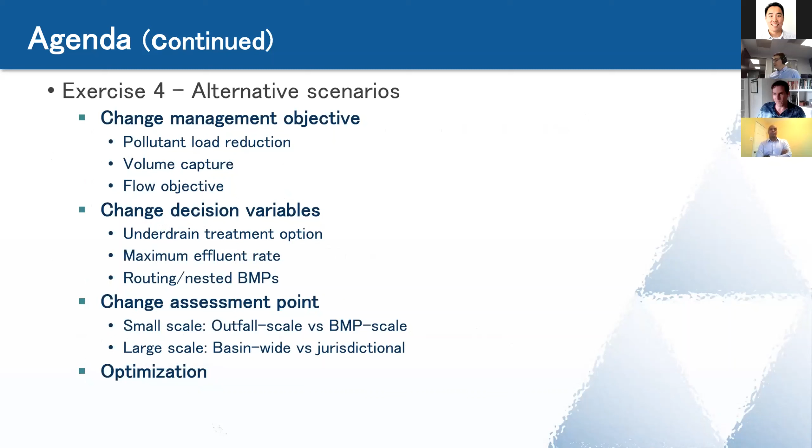And then there is a little bit of extra bonus. So depending on how much time we have at the end of the session, we may be able to get into exercise 4. There's going to be a lot to unpack in these first 3 exercises, and with whatever time remaining, there's all sorts of additional functionality and useful things that we can get into in this 4th exercise. I hope we have time to get through quite a bit of it, but we're going to play it by ear and see how much we can do. So that's our agenda. We do have these set of objectives that we want to put up front, just to put us all on the same platform for what we're about to get into.

And the objectives are: 1, understanding Sustain just as a model. It's a process-based BMP model, and we'll get into what that means. If we can help everyone understand what that means and how Sustain operates in broad terms, that's our first goal. And then once we've done that, having you all be able to prepare a Sustain input file for simulation. So to do that, you would need to be able to run LSPC to generate an input time series, configure the necessary folders and files to get that run ready, and then adjust input parameters to match project design. And a lot of that, if you're not familiar with Sustain, might sound like French so far, and that's okay. It'll make sense if you rewatch it again at the end. But by the time we get through this, hopefully everyone will know what those things mean and how to do those things.

Second to last is being able to troubleshoot common errors. For anyone who's modeled LSPC or any other program, there are a lot of challenges and issues that come up when you're running something, because there's so much that's going into these models, and there's a lot of little things that come up very often. And so we'll go through our list of common issues that we feel like we come across a lot. And hopefully by sharing those with you, you all can understand those so that you don't have to hit those speed bumps as often. And when you do, you understand what to do and how to overcome them.

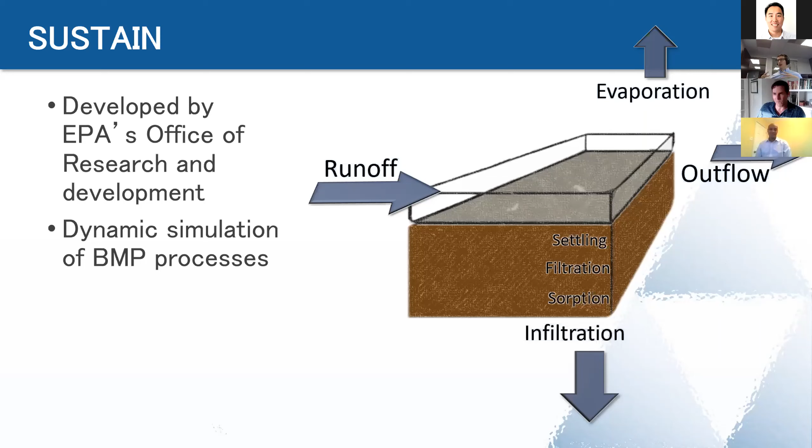So if I only have evaporation right now, but I want that to represent evapotranspiration from plant processes, that's just a dial that we add. We can also add an underdrain. And those processes, like bioaccumulation, biotransformation, phytoremediation, we don't necessarily have knobs or dials for within the model, but you can simulate their effect by adjusting parameters. So just adding a little bit of that for how to adjust and dial in processes.

Yeah, that's right. Thanks, Ryan. And as you see, we think of it like a Lego box, right? So you put the pieces together that you need to represent the construct that you're trying to simulate. And so if you have an underdrain, you can tack that piece on at the bottom. Now the system has some guidance to step you through what types of opportunities, because really the opportunities are limited by your imagination and how you can construct these things.

Some of the processes that are listed in here sound pretty involved. Now the model is not going to be simulating phytoremediation, but for example, if you have laboratory information or a case study where you have what that process looks like in terms of the time of decay of a pollutant, or the filtration rate through a soil media, or the final effluent concentration through the underdrain, those are the types of information which are usually commonly available or that you can monitor in the field. SUSTAIN gives you a way to put those in to represent those complex processes.

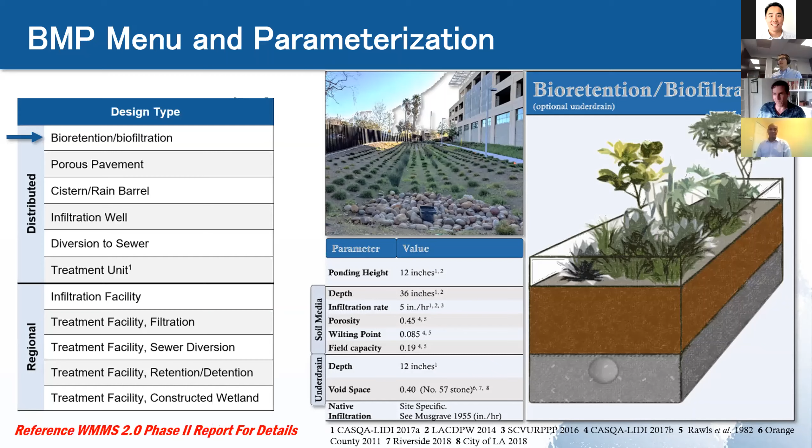But this is a little bit of shopping. If you want to do porous pavement, we would just recommend you go to the WMMS report and look for those design detail specifications, and you can port those into the model, and we have the citations and sources for that. So it just sets you up here for that. Awesome.

Okay, so that concludes the first part of just setting us up. If there are any questions, I think it's a good time to raise a hand, and we can address some of those things now as they pertain to those slides. And if there's nothing, we're going to get right into the first exercise, which is going through model preparation. Okay, I'm not seeing anything, so we're just going to jump into it.

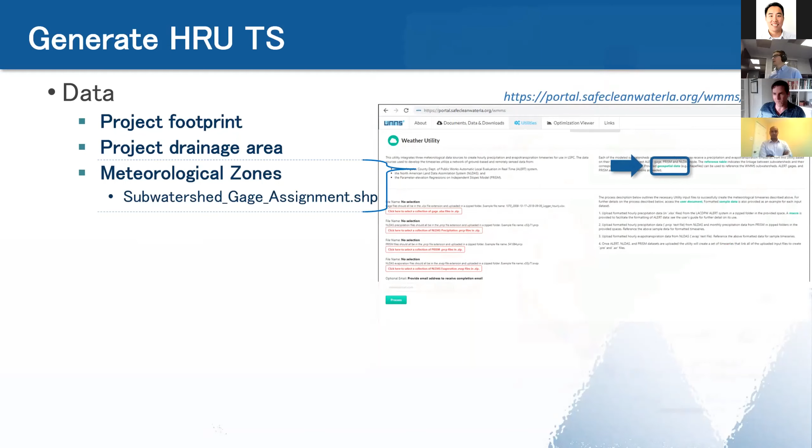So let me flip to the next slide. And I've got that same image we had before showing the drainage area, but now I've popped on these meteorological zones. So that's what these pastel colors are, showing the different zones for precipitation. And so you can see that a lot of the drainage area is this P391C_3, and you don't have to worry about what the numbers are. That's less relevant. But that's how we've named these things. There's a whole naming convention associated with it.

But it's mostly this green one here on the right, to a somewhat lesser degree, this other one, D1277. And then, actually, I've got some squares on here. We got a little bit up here, pink. We got a tiny amount of D1277 there. And then we have a little bit of this P391. And so if I'm going to get ready to run LSPC to generate runoff for these precipitation files for this particular project, my first thought is, wow, that's a lot of precipitation files. It'd be really easy to deal with one instead of 5.

And so there's two approaches, and John, I'll have you in on this too, but there's two approaches to handle this. We can take this precipitation file and we can assign it to the whole area. Or we can mesh these together. And so if this is maybe 55% of the drainage area, this is 30%, this is 2%, whatever makes up 100%, we can do an area weighted composite of these five precipitation files and create one from it. In most cases, that's probably not necessary.

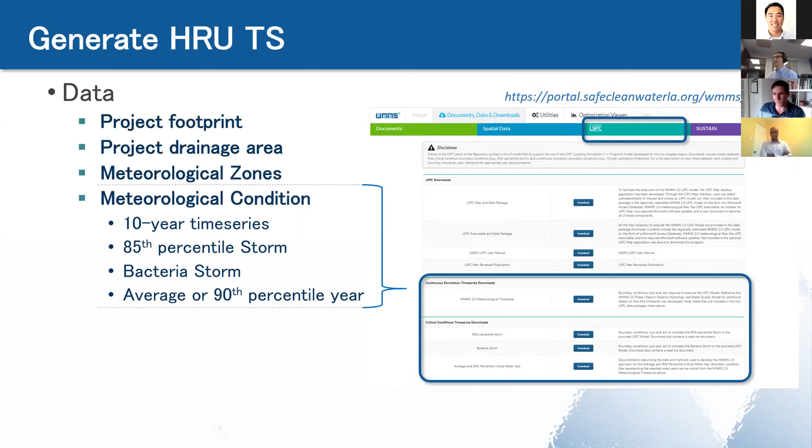We have all that data again on the WMMS webpage in the repository, and this is again the link here. It's within this LSPC panel. About halfway down on the page, there is all this data that can be downloaded. And this is the precipitation for all these different conditions for all of LA County within the WMMS model domain. And so all that data is right at your fingertips. You can get right in there and look at those precipitation time series.

So once we have all those pieces together, the next part is to download LSPC map. This is an interface that we developed last year as part of the WMMS 2.0 update, which really helps expedite and streamline the process of running LSPC. And so John and I are going to pause in a few slides to actually show you how to open up, configure, set up LSPC so that it will give you output that you can use in Sustain.

And so that's coming. But before then, this is the location on the repository where you can download that model package, which includes a number of things. It includes the executable itself, so that when you double click on your desktop or within your folder, it pops open the application. It also includes the weather time series that we developed, which is the same as this right here. There is a Microsoft update in there.

I think there's actually two, because Microsoft just updates things through time. We've included two aspects of the operating system that need to be updated so that you can run LSPC map. And so those two things, as well as LSPC map as a program, I imagine you'll need some sort of administrative privileges on your computer.

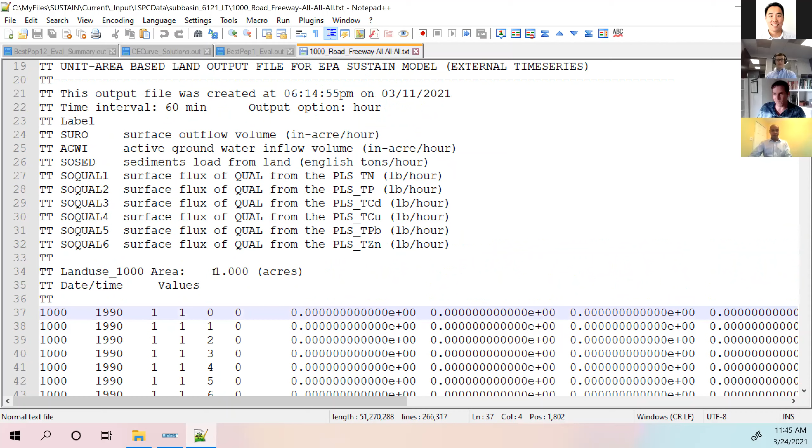And all these are generated for 1 acre of each HRU. There are 99 files in this folder, and 2 additional files, AGWO and IFWO. They're not going to be used in this application, but when you simulate subwatershed 6121, this represents the full set of information to generate all that's coming off the land surface. The AGWO and the IFWO represent the total base flow, interflow, and active groundwater outflow from that one subwatershed, aggregated across all the HRUs in that subwatershed.

So in some cases, when you're running a larger network in SUSTAIN, and you need to route your base flow through the network to some downstream point where you might divert some of that flow into a BMP or a regional facility, that's the piece you would use to link that in. We're just dealing with runoff in this example, but this gives you a view of what is in this folder. Now, what we're going to do in this exercise is generate these files from the LSPC map.

Pardon me. All right, and so here is our view of our subwatershed. I've kind of pre-cooked a scenario in here, and the way that this interface works, it allows you to go in and select a single subwatershed, or you can select a whole network of subwatersheds when you click this upstream. If I click on a specific point in the network, the model will select the upstream network. All the subwatersheds that are hydrologically connected to that will be selected.

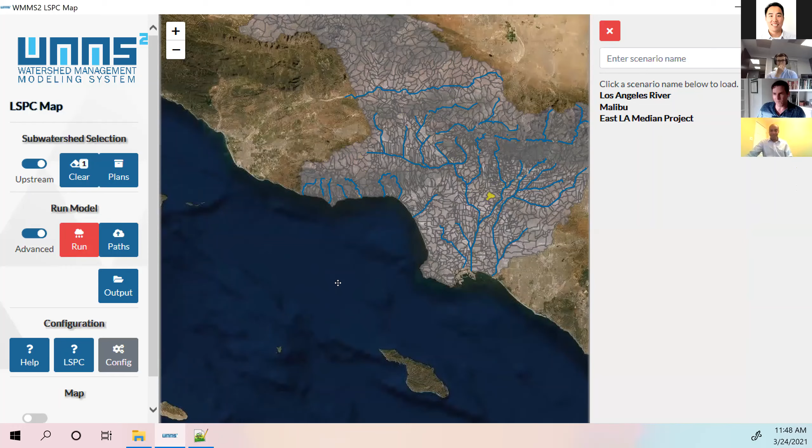In this case, what I'm going to do is just select my East LA Median Project subwatershed. I've defined that as a scenario. So I went in beforehand, selected that subwatershed, and then saved it as a scenario. And so likewise, I have all other scenarios that I've defined. This is the one for the whole LA River. This is Malibu. And here's my itty-bitty project for this case study. So we can just zoom in to see what it looks like.

So a nice feature of this LSPC map interface, it's actually a browser emulator. It's looking at aerial imagery from OpenStreetMaps right off the web. So it's as if you're working in a Google environment, if you will. And here's our subwatershed model boundary. I can see an aerial photograph underneath it to make sure that I am in the right place.

It's not exactly the same shape as the one Ryan was showing before, because that was the drainage area for the specific project. This is the sub-catchment in the model. So we will be doing a different boundary in SUSTAIN than in LSPC. But ultimately, we're trying to get the unit area runoff, which is based on the rainfall associated with this one subwatershed. So we're okay, because that is not going to change. That's independent of the drainage area.

So once I've selected my East LA Median project, I can tell LSPC that I want to run this project. Now, by default, your tool is going to come in the default setting where it's just going to run this sub-watershed and give you an output. For this application, we don't want that. We want to use an advanced opportunity because we're going to tell LSPC to do something slightly different. So when I press run this time, it's going to open it up on the second monitor over here. It brings this screen up. I press OK. I don't need to change any of those settings.

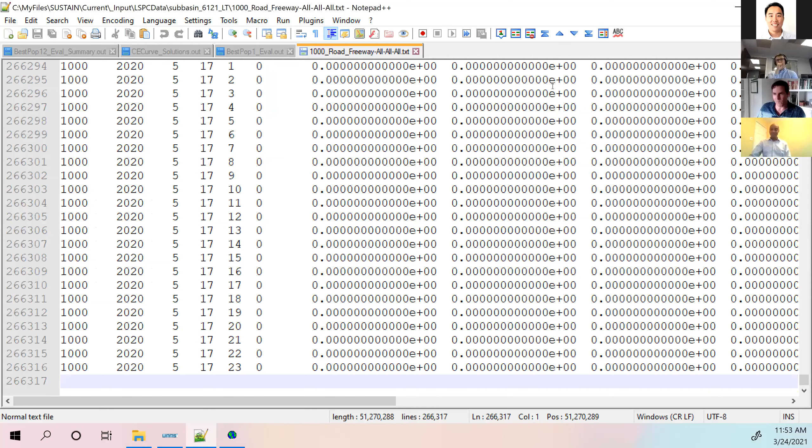Now, the other thing that I want to look at here is the time period. The time series that were read in were the default time series. So this is the long-term simulation time series. For the time period that I'm interested in, I'll just generate one that looks exactly like this file. So it's from January 1st, 1990 through May 17th, 2020, if that's what I want to do.

One way to do that is this knows the boundaries of those files. So I just set the start time to be the very beginning. All I'm doing is I'm pressing the end.

Okay, if I want to change this to be... this was May 17th. Okay, it looks like I don't have the latest time series. Well, I'm going to generate this through water year 2018, just for example here. So we'll go to the end of water year 2018, just for example.

Now, there's a simulation period and an output period. The reason why the model has them is so that we can throw out a period of time as a spin-up period if we don't want to include that in our boundary conditions. So let's say this is from January 1st, 1990, but let's say I wanted to just run the water year starting in 1990, October 1st. I start it from January 1st so that the first 9 months I can just ignore. And then the output is going to begin on October 1st, 1990.

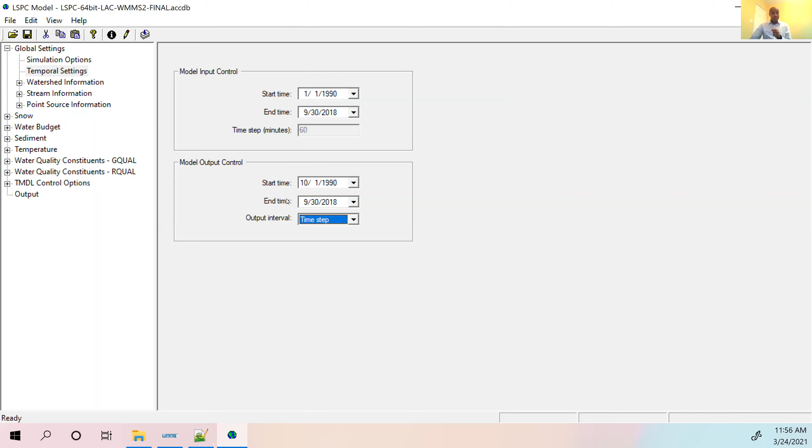That's exactly right. This is how you set your spin-up period. And so in this case, we've defined a spin-up period of 9 months that we're going to disregard. Another key thing with this output period, this is what is going to drive your summary file. So the model allows you to generate summary files for land use, stream, point source, on an average annual, yearly or monthly basis. We're not going to get into those summary files here, but they're pretty important. They're a handy way of summarizing a lot of detailed information out of the model into one nice CSV long form file.

So what I'm trying to do here is to generate my unit area land use time series for SUSTAIN. So I want to make sure that this box is checked. And just because we're customizing everything, I'm going to go ahead and redirect this to the same folder where I'm going to have my SUSTAIN output files. Wait, let me make sure. I need to go to my current input folder. LSPC data, and I'm not going to overwrite this one. I'm going to create a new folder.

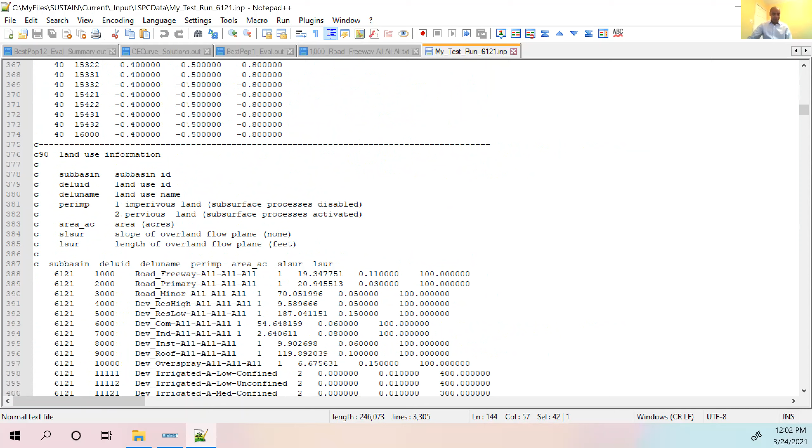And so on. Here's where I specified the inputs, and my output folder is here. It's created this folder and it's running it. And then at the same time, it tells me that I had 96 possible HRUs. Here's where I specified my simulation time period. If I go down to card 90, card 90 has my land use information.

So for this subwatershed, for this HRU, I had this much area in acres. I am running the subwatershed, so it's going to give me runoff aggregated for all the HRUs in this watershed, and it's going to give me my unit area loads. Notice that we didn't have some of these HRUs, like there was no irrigated A soils, low slope over an unconfined aquifer. There is none of that in this subwatershed. But my unit area time series will have a file for that, just because it is a possibility.

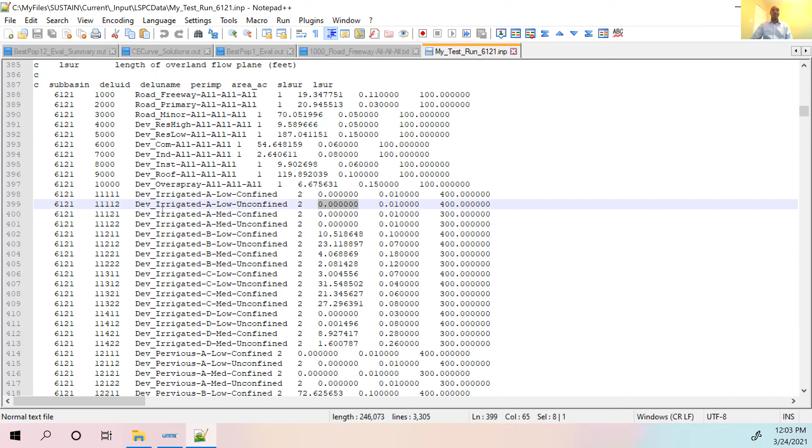Part of the beauty of this later on is, imagine if you're running SUSTAIN and you want to do land use change scenarios. Let's say you want to increase development in your drainage area by 10%. That gives you a chance to reconstitute by adding a little bit more impervious area, assuming that that's what development is doing. You can reconstitute your footprint of HRUs to represent a land use change scenario. And so that is an illustration of some of the flexibility that comes along with that.

John, I'll add on here that, I don't know how much we need to go through the input file, but I don't think Public Works as users will probably go through the input file. Hopefully, won't have to. So if this seems a little overwhelming and daunting, it's because there's a lot of information in here, and LSPC has been built with that dialog box interface, and LSPC map has been built so that a user can stay out of that realm as much as possible and work on the interface, because that's easier and more intuitive than a text file.

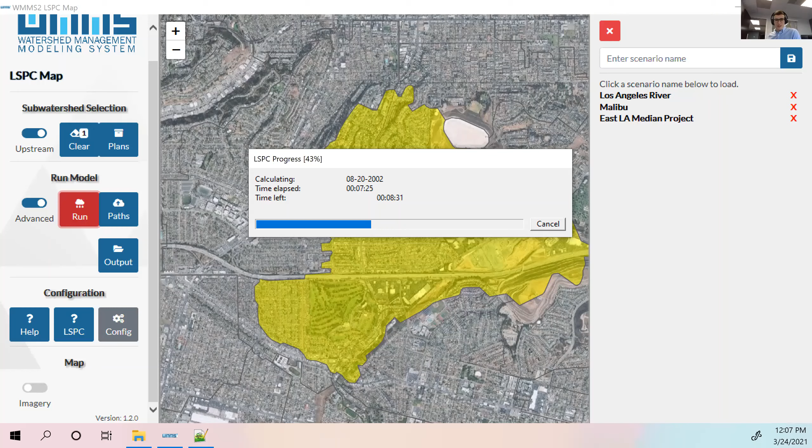All right, so I'm going to go back over to my screen, and I just want to bring home the point about what you're going to get on the output from LSPC. I already have that LSPC output pre-baked. It's in this folder structure over here, and you'll recognize these output folders. And if I go to long-term, this shows for all 96 of the HRUs, there's a text file. And if I open up road freeway, I get that time series again.

I actually don't run LSPC very often. I usually have someone else run it for me, and then they give me this, and I'm like, okay, great, thank you. And I just trust that it's right. But there is probably some level of QA that I would generally recommend anyone does when running the model. If you want to feel confident that the model is giving you sensible output, this is a place to do that.

For me, text files are not intuitive to work out of. So what I would do if I wanted to take a look at this output on the fly, and it might be a bit to paste, so let's see if I can just do a portion of it. I can drop this into Excel really easily, and all those tab delimiters just drop into the cells. And if I wanted to plot this up and see what that hydrograph looks like, because this is a hydrograph, I can see a little of that coming through. I'm only doing the first couple days, and apparently there wasn't much precipitation, so there isn't much action here.

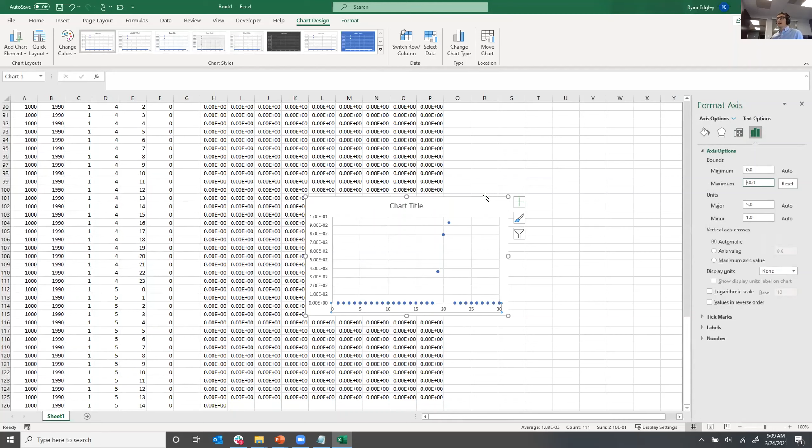The format for this text file is a little, I don't know, not really my conventional way of looking at text files. So you can actually aggregate the year, the month, the day, and the hour into a single cell. I forget how to do it. I think you can do something like year, and you're like, hey, yeah, this is a year, and then you can do month. Yeah, hey, this is a month over here, and you can aggregate that and bring that all into one column here. And then if you plot that, you can get a really good picture of at every hour of every day of every year, this is the runoff that was generated.

And then I'll just plug in on that, Ryan. That would be the date function. Date function. Thank you. Yeah. So with the date function, then you say date and then year. Yeah, there it is. On the day. Yeah. Beautiful. Now it's all in one.

And sometimes what I'll even do is I'll use this function. What is that doing right now? I was having a tough time, but you can transpose the selected cells, and you can just put them over here. So instead of going counting over here and then counting over there, you can just set those, blow all these out, and you can see exactly what's over top of each of these. And to me, there's a little bit of work involved to kind of get this set up, but once you have it set up, you can actually take another input file, output time series, and you can just paste the bulk of the time series right here. And you don't necessarily need to update this other stuff because every input file follows the same format.

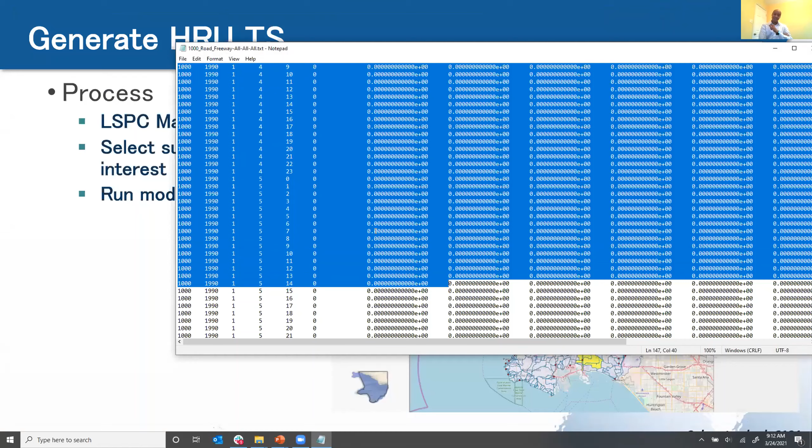Just to recap on that, this file is for 1 acre of runoff. So that's another consideration. You're going to actually reconstitute the drainage to your BMP in SUSTAIN by saying how many acres of this file exist. Yeah, that's a really good point. And so when I look at these, I'm always like, wow, those numbers are so small. But what John just said is that this is a representative acre of roadway. And so in our drainage area for this BMP, there may be 30 acres of this type of roadway or HRU, and 20 of another one, and 10 of another. And so that's a multiplication factor on this time series. And so what SUSTAIN does, it'll load up all of these HRUs, and then whatever acreage we specify, it'll multiply that number times all of these, and then it'll aggregate based on drainage area.

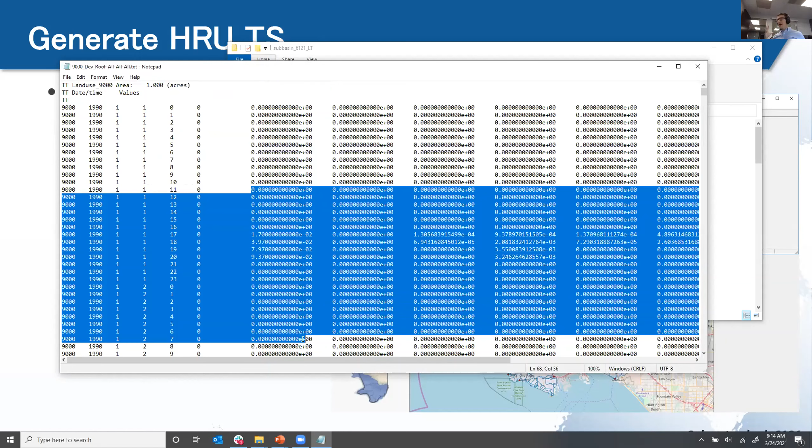What I was thinking in my head was, if this was rooftop, and we do have a rooftop one, don't we? Let's say Jeff Bezos gives you a call. He's like, hey, I've got this Amazon warehouse. It's going to be huge. We need a cistern to capture that. You don't need 96 HRUs to do that. You just need roof. And whatever Jeff Bezos says is the acreage of that, you put that in that SUSTAIN file, and maybe it's 100 acres. And SUSTAIN is just going to take these numbers and multiply it by 100. And so there's not any sort of weird math, there's nothing too fancy or complicated.

We use the unit acre because it's a small enough standard that we can apply and scale up to any size to meet the drainage area that's there. And so if it's 100 acres of this, or 10 of that, and 12 of that, and 11 of that, SUSTAIN does all that work to aggregate and multiply all that. We just have to give it an outlet at the end and say all of that HRU and runoff that results from that goes to this point. And that point might be a BMP, it might be a node, it might be the outfall. And so that's what the SUSTAIN part of it is, figuring out that drainage. What we're doing here is just giving SUSTAIN those unit area pieces of runoff and pollutant loading, so that it can run any sort of combination of HRUs that we want to give it.

Whew, that was a lot. John, I'm going to wrap up this section. Is there anything else you think we should add or is worth mentioning here as we wind down on LSPC? I think that covers it. Okay. Right, a good transition to SUSTAIN.

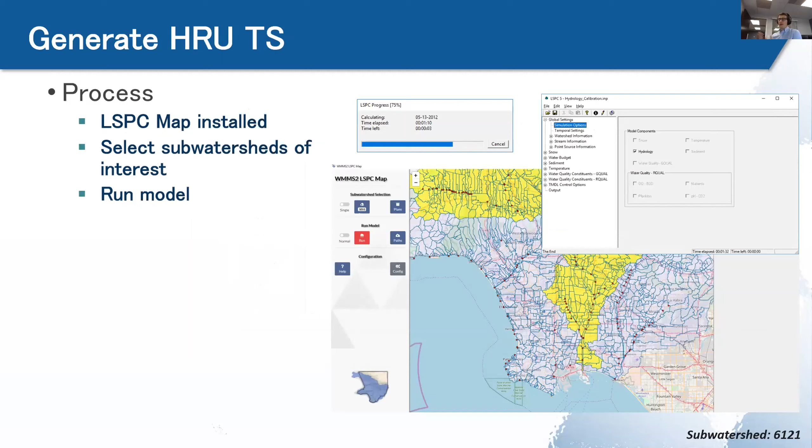Great. So that was really the end of our first exercise, and I'll do a brief recap here, which is we want to get the data that we need in terms of the drainage area, meteorological zones, the condition we want to consider, downloading and installing LSPC map. John walked us through that we want to do the advanced function once we've selected our subwatershed of interest. We click through that first screen, we make a couple changes in terms of output and dates, and then that final checkbox on the unit area time series output, which we were just looking at over here.

And then once we've looked at those files after running it, feel good about it, feel confident about our LSPC results, then we're ready to transition to SUSTAIN. And so that's what the next exercise is.

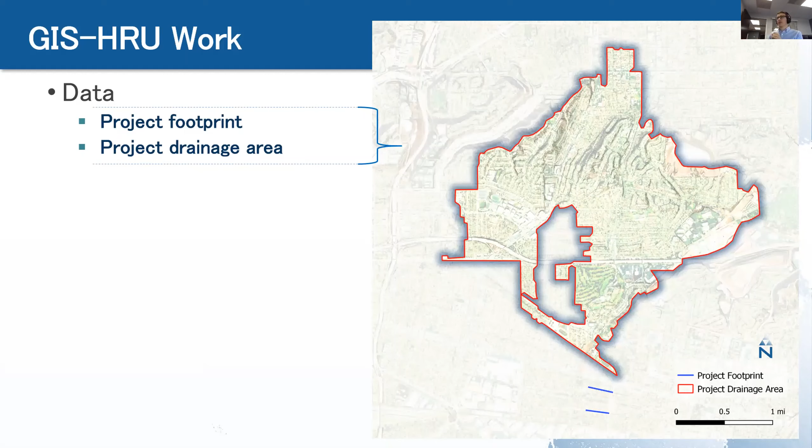So John was showing how we can generate time series for all 96, but we may not have all 96, and we don't necessarily know how much acreage of each is in our particular drainage area of interest for this project. So again, I'm showing this map of our project drainage area, and we're going to want to grab data from the WMMS web platform. Again, the link is up here on the top, and we want what's called the complete HRU raster. There's two here: the mapped HRU raster and the complete HRU raster.

Again, this is one of those things where we have both so that people can use either. Mapped doesn't include a number of things that the complete one does, and we don't really need to get into those details, but I think you'll always want to use the complete HRU raster. It includes disconnected impervious area. It includes irrigation and overspray. It is the complete set of HRUs for WMMS 2.0.

So this is what you would download, and that is a TIFF file, or a raster of the model domain. I don't have a legend here because there's 96 of them, and it would get pretty cumbersome pretty quickly, but it shows high slope, tall vegetation, soil type A, or low slope, soil type D, impervious cover for a rooftop. It has that whole range within this. And what we need to do is figure out what's our composition for our drainage area. It's great that we have this whole area, but we only need the portion for this particular model area.

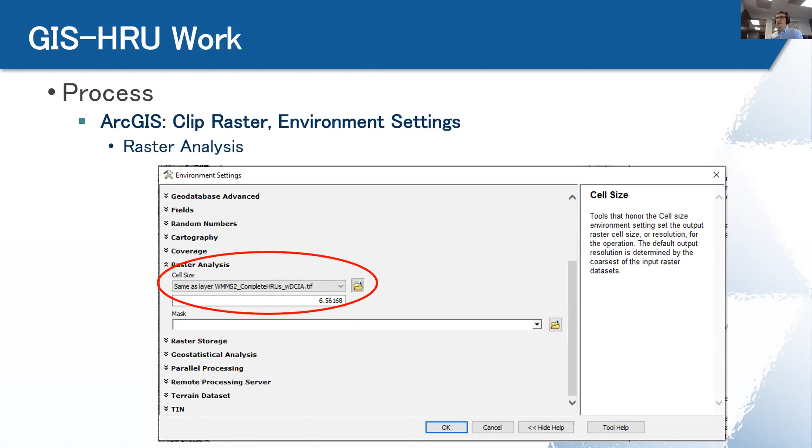And so once I've done that, I've clicked OK, I've hit execute. It might take a few minutes depending on how big your area is, but this is what results. That big raster that we had before has been clipped down just to our project area, because this is the area of interest for us.

You oftentimes have to build a raster table for these after these clips, and so there's another function in ArcMap that will do that as well. And so it's really easy. I just do a control search function within ArcMap for build raster table. I drop in that new clipped HRU raster that I have. I check overwrite just in case, and what I get is an output table.

And there's a couple things that are worth mentioning here, and that is that the values here, those are the HRU codes. And so we showed 1,000, 2,000, 3,000 in terms of our HRUs that are coming out of LSPC and into SUSTAIN. You'll notice that these numbers here will match exactly with the numbers we have here. And so I've got 22,000 cells of road and freeway, 47,000 cells of road primary, and so on and so forth.

What's really important here is that count is the count of cells, or the count of the number of pixels. And if every pixel is 4 square meters, that's the resolution of the original raster and the raster that we created. There's some math that someone would have to do to say, all right, well, 22,432 cells equals some amount of acreage, which is the unit that SUSTAIN expects in the model. So there is an additional bit of math here that someone would have to do.

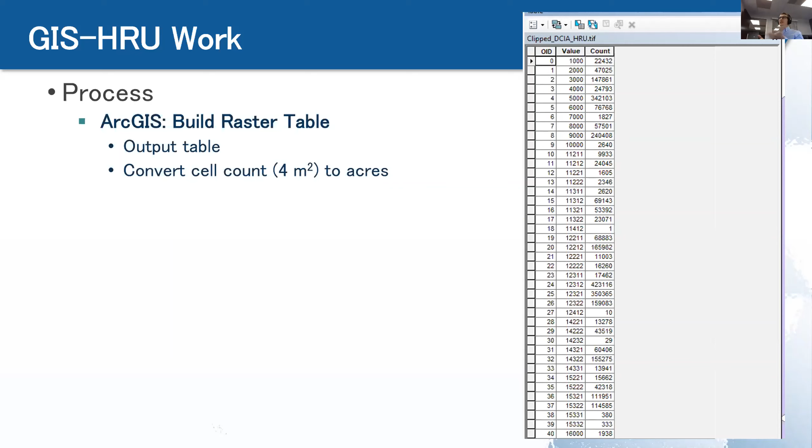So you've got to find that conversion factor for, well, what's 4 square meters? How many square meters are in an acre? And then you can use that to convert to get acreage of each of these HRUs. So that's kind of a quick, simple rundown of it. There's more complicated ways to do it.

We do have a utility tutorial document that goes through everything that I just explained pretty well, but also if you have multiple drainage areas for multiple different BMP types, there's another avenue in GIS that you would take to do that, and that's zonal histogram. We're not doing that here because we're doing a pretty simple drainage area for this particular project. But in the future, if that comes up for you running a model, I would recommend going to this documentation and looking at how that describes that process, because that'll be helpful in showing that pathway forward.

Yeah, just one comment on that, Ryan. I think one key thing behind this complete raster, and Ryan touched on it, it has baked into it a lot of the key assumptions that went into the model build. So when you look at this, we talked about directly connected impervious area. In the model, the mapped impervious area is what you see from a bird's eye view.

But in the model, the actual response, let's say you have an acre of rooftop, but then it's surrounded by a 10-acre lot of grass. The amount of the effective impervious area, some of that runoff is going to go over the pervious area. That whole response is going to be very different than an acre of rooftop surrounded by a quarter of an acre of grass, right? And so the model uses directly connected impervious area to kind of adjust for that. All those assumptions are baked into the complete raster, because we've gone in, done that empirical relationship to translate mapped impervious to directly connected impervious.

Other assumptions like the irrigation, which is represented as a portion of the pervious area. And then even within that, irrigation overspray, which is a percentage of the impervious area that's adjacent to pervious land that could potentially receive overspray from irrigation. I mean, imagine trying to account for all of that. Those things aren't really spatially represented traditionally in the model, but in this raster they are, because what has happened is we've taken the percentages from the model and then sort of peppered on those impacts into the raster.

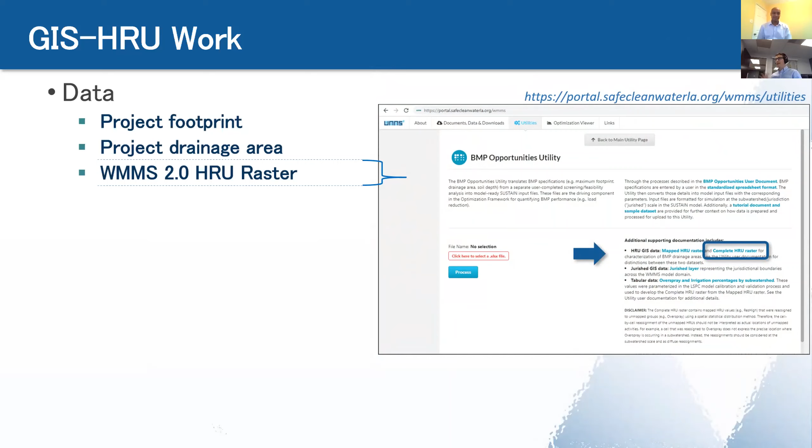Thank you, John. That's a great point. So to, I guess, summarize it, all of those complexities that we've built into the calibration of the model that's baked into the HRU raster, that's already in the complete raster. And so if you want kind of the easy button, you just select this and you download it, and it's already taken into account. And so you don't have to think about those things. We've already done it for you. So that's that.

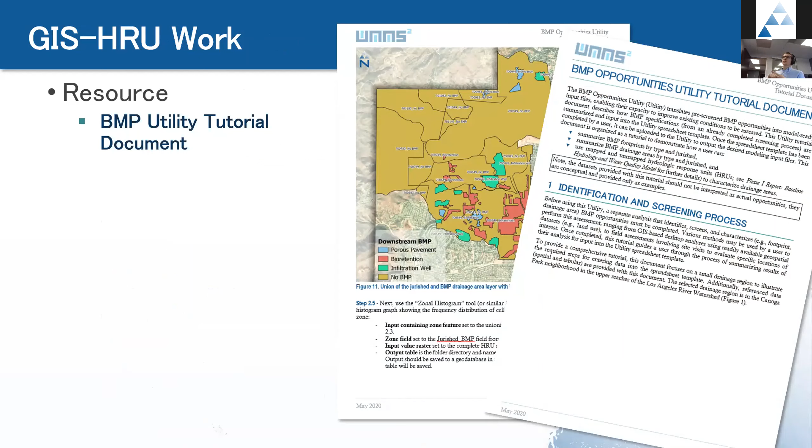So once we have the, let me go back just a little bit here. Once we have all of the HRU and the area set up, in my mind, the next part of the project is, all right, well, I've got LSPC done. I've got the HRU acreage understood for the drainage area of my project. The next thing is, well, when that runoff from that HRU area gets to my BMP, what does that BMP look like? Is it a bioretention cell? Is it an infiltration well?

And what we want to do with this section is to start to get you all to think like SUSTAIN. So if you can think of the processes that SUSTAIN is doing and how they will impact a BMP, that's kind of what these next set of slides is. And so when someone is going to give me a project for a particular area and they start talking about the BMP, I start to think about it in terms of these segments. What is ponding height? The space on top of the BMP, if it's a cistern, that's like the 5 or 6 feet for that cistern.

Is there soil media? What's the depth of it? What's the porosity? That helps understand the amount of storage in there. Infiltration rate, how quickly does water percolate through that media? Is there or isn't there an underdrain? Is it lined? What type of treatment exists in that underdrain? Is it a percent reduction? Is it a constant, or is it a minimum effluent concentration?

Is there an infiltration rate for the native soils? If so, what is it? And so taking that kind of picture that we had before and starting to break it down by slice, and showing that SUSTAIN kind of handles each of these things, at least in terms of parameters, with different values in different places. And then we put it all together in the model and say, hey, this is our BMP as a unit. And then it will behave accordingly.

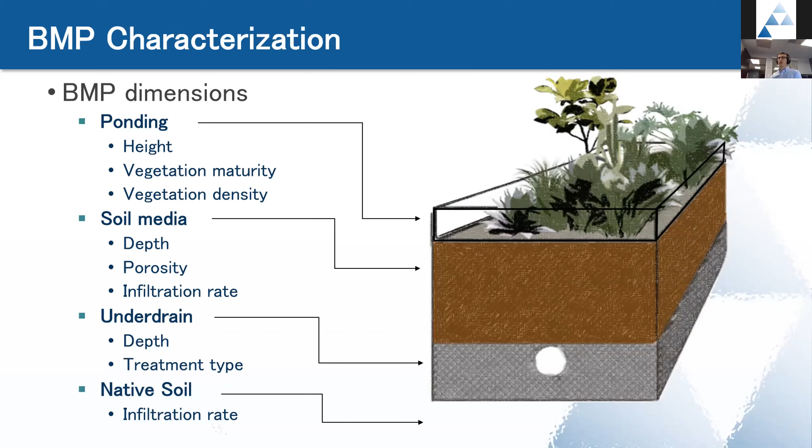And so infiltration well, that's the type of BMP that we're going to be using in this project, in this exercise. And so let's kind of turn our attention to that. What does the ponding height, soil media, underdrain, and native soil look like for that? We have to think about it in terms of consistent layering. So it's kind of like a parfait or a layer cake, where the ponding height is a certain height from A to B, and it is only in that section from A to B.

And so what makes infiltration wells a little funny is that you've got ponding in the center here, but you also have media around it. SUSTAIN can't model the compartments of the BMP in those terms. So what it has to do is put ponding on top, and that media, the volume available for stormwater, we put that below it. And so instead of having this vertically segmented BMP, we have to kind of reimagine it in our brain.

We have to think like SUSTAIN, so that we can characterize the storage capabilities of that unit as it exists in reality, but we have to reimagine it so that SUSTAIN can have those volumes and properties so that it would be simulated as it is in the ground. And so for this particular project, there's a big ponding height. We went ahead and pulled the Safe Clean Water application for this project to get an understanding of, well, what is the ponding? What is the soil media, if there is any?

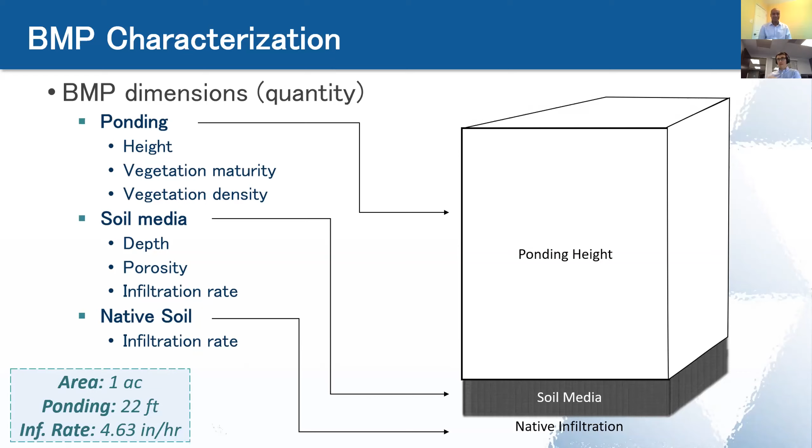Okay. So that being said, this is the actual transition to exercise 2, which is configuring SUSTAIN. Now that we have our mind starting to understand where we are in terms of drainage area, HRUs upstream, what does a project look like? What's the runoff time series that we have? We have a lot of what we need to run SUSTAIN. Now we've just got to get the model ready for that simulation. And so that's what this exercise is.

So the first thing we need to do is download the executable. It also comes with a Microsoft update again. And this just allows SUSTAIN's DLL to have a broader library of essentially code to run. So it needs this. And so you would download both those things. Microsoft update, again, you would need administrative privileges to install that.

We've already talked about the HRU time series. It goes into a specific place on your desktop, because what you're going to do with your input file is say, hey, you're going to be looking for HRU runoff time series. It is here on my desktop.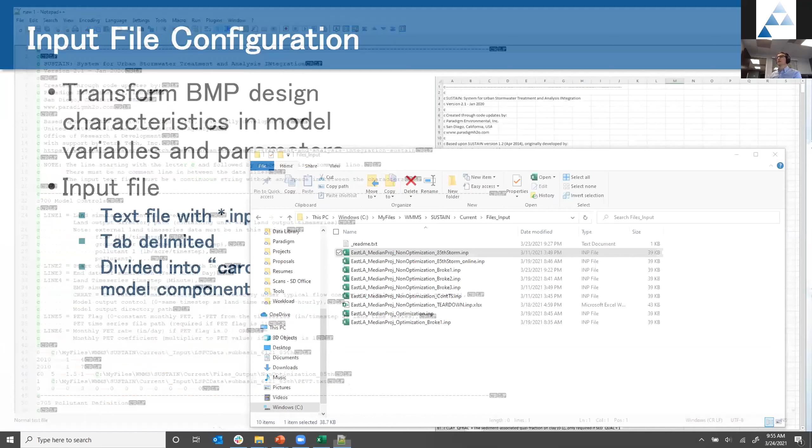But this is a really great way to look through your input file. There's a Ctrl+F find and replace in here. It's just much better than your standard text file, and there are some compare options that are super handy. I've saved a lot of time using that function. So if you need to make a change to an input file, use Notepad++, but we're gonna use Excel to go through this example of a teardown.

And so that's actually what we're gonna probably do for the next, I think, at least 30 minutes. So what I would say is buckle up. If you're taking notes, this is probably the point in the presentation where you're gonna take the most notes. And you're probably going to go back to this part of the recording the most because there's so much information in this input file that dictates to SUSTAIN when is the simulation, how big is the BMP, is there routing involved, what's the drainage area, what's the acreage of that HRU drainage area.

There are a lot of details in here. And so we're going to go through each of those details that are most important. There are all sorts of details that are less important and we're going to spend less time on. So we're going to try and bring the most important things up to the top, and then mention the things that are less important, and probably leave those for later in the presentation as we have time.

But real quick, before we do that, the input file, just to say it up front, is a text file, but it uses a .inp extension. That's just what SUSTAIN uses. It's really just a text file. Secondly, it's tab delimited. Sometimes you can have space or comma delimited files. This is delimited by tabs, and that's really important, and we'll show why. And then it's divided into sections that we call cards. So just like LSPC has an input file that's text-based, tab delimited, and separated by cards, SUSTAIN is the exact same thing, except those cards mean different things because we're in a different model now.

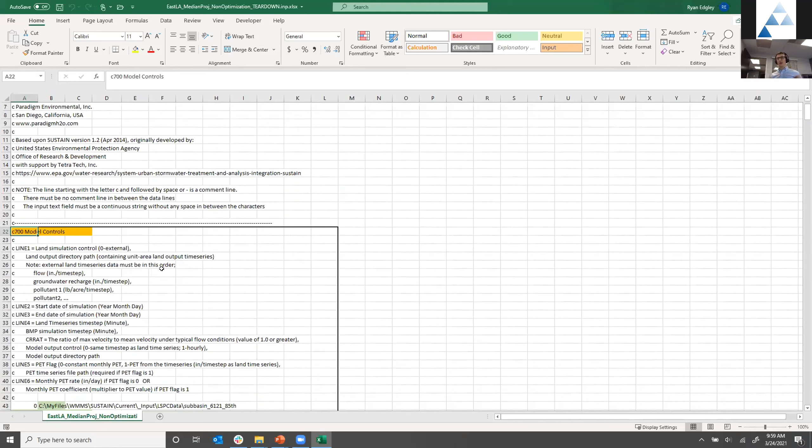And so as you begin to do that yourself, seeing this more often is going to be helpful. And so we want to give you a lot of exposure to this input file before we send you all off to run your own SUSTAIN simulations. So with that, John and I are going to kind of ping pong back and forth going through the different cards.

And the color coding I'll explain here a little bit. I added these boxes, these borders. These aren't really here in the input file. I just did them for visualization. To me, they just kind of bound up the card.

There is orange to indicate the first line of the card, which is the name and number. So this is card 700, model controls. There are 6 lines, which is these 6 right here, of input, where the model is actually reading this row.

And everything in green are things that we think you should really be looking at, because there's a lot of stuff to look at here. The green things are the things that you'll probably change pretty often, or are important because they can cause problems if you don't have those things correct. So that's sort of the anatomy of the formatting that we did here.

Each of these cards starts with the name and number of the card. It will start with a number of commented rows, and everything that starts with a C is commented. So when Sustain reads this, if it sees a C as the first character, it will skip until it gets down to here. Even though we read this, and it helps us as the instructions of the card, Sustain knows what it's doing. It doesn't need to read that. All it wants is the information that you're giving it, which is these 6 lines.

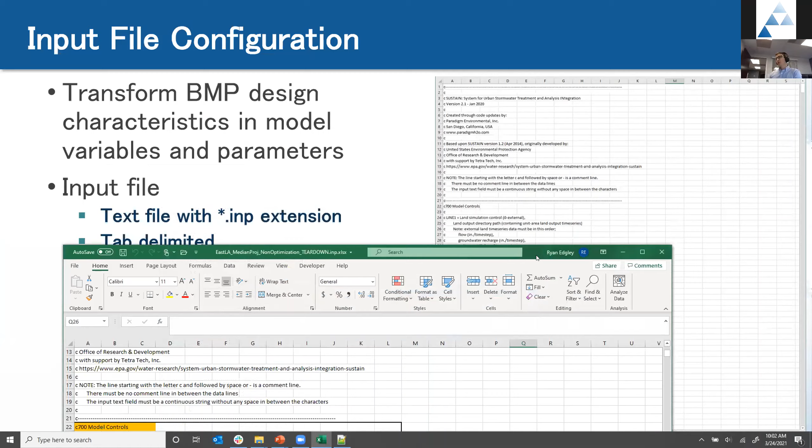But in any case, if I wanted to make a change, say instead of a 3-day simulation I want a 10-day simulation, this is where that change happens. It doesn't happen in an Excel spreadsheet. It happens in the input file. I would hit Control Save, and now I've updated that model to reflect this changed critical condition. I'm going to do Control Z because I don't want to actually make that change. But I wanted to be clear that we're using Excel as a visual tool, when in reality adjustments to the parameters or variables are done in the input file, not Excel.

So with that, we're going to go through each of these cards, and I think it might take about 30 minutes, maybe even 45. It depends. This is where questions might come in handy. I'm going to try and keep an eye on the raised hand function. If anyone has anything, this is a good place to say, hey, what is that parameter again? How does that make sense? Because there's a lot in here. We're going to try and explain everything, but there's probably going to be things that we miss or skip over. So please let us know if you have those questions. Almost certainly other people are having the same thoughts.

So with that, John, I've done some talking for a while. Oh yeah, I might add also, if you have questions, feel free to post them into the chat. While Ryan is going, maybe I can address some of those directly in the chat. That's a great suggestion. Thank you, John. Yeah, so put those there. We'll look for them. John, I'm going to hand it off to you to do card 700.

I don't think we need to go line by line up here. To me, it's just, what do these green things mean? John, if you think one of these should be green, we can change it live and say, this is important too because XYZ. But the instructions are going to be here for you all to read in the future, when we're not here for this presentation.

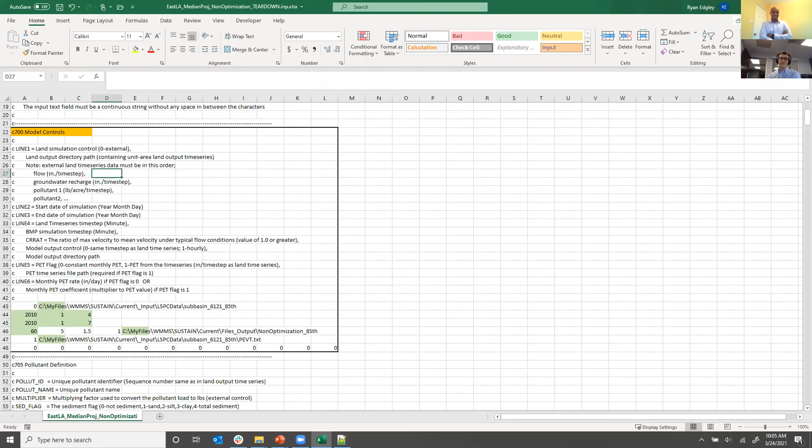Awesome. All right, well, the first card in Sustain is card 700, and people are always like, why in the world are you starting with 700? Well, if you are an LSPC user, if you recall, the last card in LSPC is card 690. And the very first version of the BMP module was actually done in LSPC. And so we started from card 700 with the BMP rules. At some point in time, we realized that it was just bogging down LSPC to have all this BMP model bolted onto the end. And so we split it out of the LSPC model into a separate module, which ultimately became Sustain. So that's kind of the trivia behind the numbering there of card 700.

But the first line in card 700, you'll see in there the option that is not highlighted, the 0. That is the external option. That's the only option that's available because external means that we are going to be getting our unit area time series from outside. So that's the way that we run Sustain now. We don't try to generate time series within the model. We take them from what LSPC has generated. So as Ryan mentioned, that folder there, that's the path that tells us where those files are located.

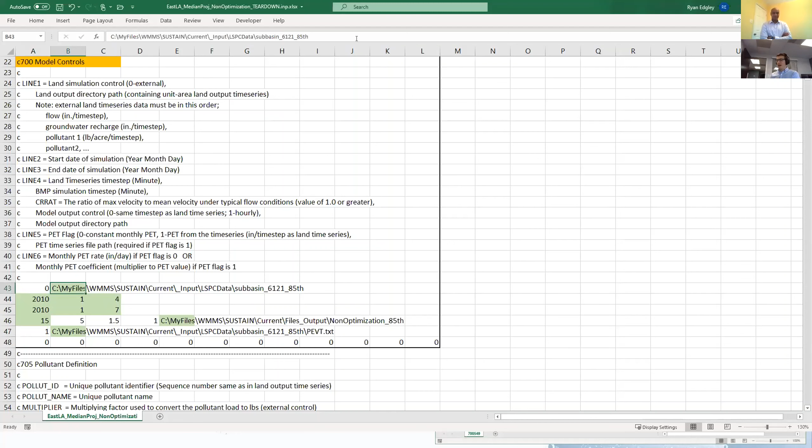And so you'd have to go back into LSPC, reconfigure it for 15-minute, which can be done. And then once you have those 2 things in sync, then you can run at 15 minutes and your output is now in 15 minutes. So there is additional resolution that can be gotten there, but we usually don't do it because hourly is in most cases sufficient and it runs faster, of course, than 15 minutes.

Anything else on that card, John? No, I think that's it. Okay, so the following cards I'm actually going to largely skip. This is defining the pollutants. So this is where we say, hey, Sustain, we've got 7 pollutants. They are total suspended solids, total nitrogen, total phosphorus, cadmium, copper, lead, zinc.

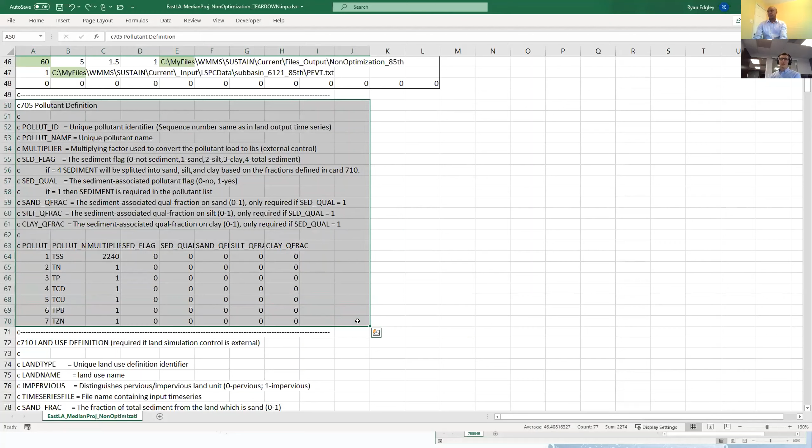We don't expect that any of you will ever change this because you're in LA County and you're using the WMMS model and it's using these 7 pollutants, always in this order. And we've got the multiplier for total suspended solids set up here. So unless you're going to model something in Orange County and do different pollutants and kind of change your whole configuration, which we don't envision you all doing, that would be done here. But since that's not happening, I would save your brain power for the other cards where more changes are happening.

710 is another card where I don't imagine any of you all will change. This tells Sustain what are the HRUs in this model, what's their name, and what is the text file associated with them. So at this point, Sustain will open up this folder and it will look for these text files inside of the folder that we indicated. And it's going to read each one of these. It's going to assign a number to it. It has a name. The name is just really for us. Sustain could care less what the name of these things is. There's a sand, silt, clay fraction associated with them. Those are really model parameters that we've dialed in.

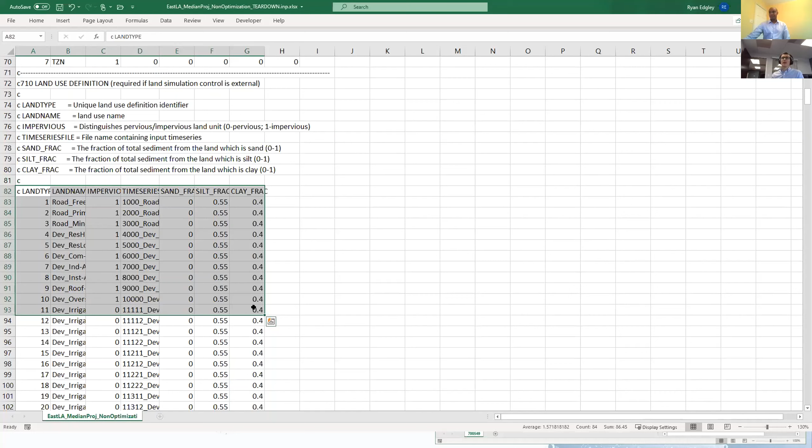And again, since we're going to be in LA County, you're always going to be using at most these 96. You'll never be using more. So this is, again, something I think you can skip, card 710 altogether, and say, great, the HRUs are there. They've taken care of it for me. I don't have to worry about it. 712, aquifer information. I've never used this once. I think this is one of those things that Sustain was built with that functionality in mind, but we went a different direction and we just have never used that. And so John probably knows more about the history of that, but I don't.

Yeah, the aquifer, so that second column that we were talking about in the LSPC outputs, which is the groundwater inflow, that was there to connect with the aquifer. So if you wanted to catch all the water that's infiltrating in your drainage area, save it, attenuate it, and then release it back somewhere downstream in your system, you can build an aquifer into your model to kind of track water. Likewise, any water that infiltrates from the BMPs, you could send that to the aquifer as well.

And then you can specify the recession coefficient, the storage, the rate at which that water is released from the aquifer to some other point downstream in your network. So, yeah. So in short, this is fancy modeling that we don't really need to do for almost any situation. So we can save that brain energy and walk right on by.

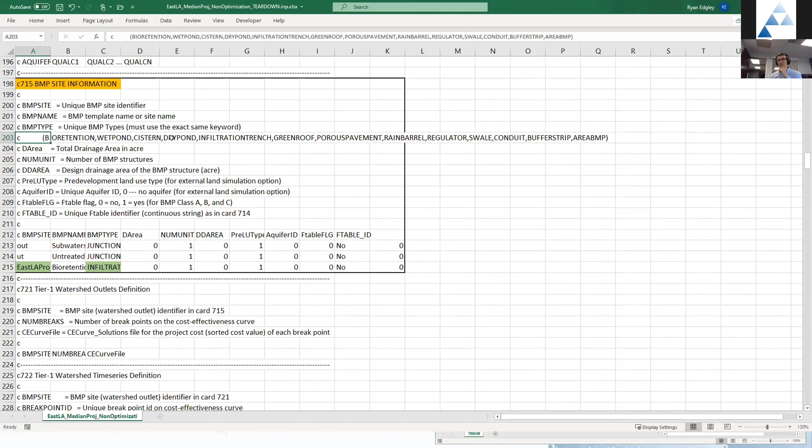And then the BMP type is quasi important. There's really two types in my brain of BMPs. There's junctions, and then there's everything else. We could have called this, instead of infiltration trench, these are all the options up here. We could have called it bioretention, wet pond, cistern, dry pond. You're almost always going to want to use infiltration trench as your BMP type of choice, even if it's a bioretention cell, even if it's a wet pond,

even if it's porous pavement. There's only very few instances in Sustain where you're going to want to change that to a cistern or a swale or a rain barrel. There are different rules for those. Since that's not in this project, we're not using those, and I don't suspect that you all will encounter that either. So we're using infiltration trench here for BMP type under this header, and I would think that for all the projects that you're all using, you will do the same.

The other junctions up here use the BMP type junction. So this indicates this is not a BMP, that it is in fact just a place in the model where we put a node. I'll draw the routing network later, but in my mind, there's a BMP at the top, there's an outlet on the bottom for all outflow, and then there's the untreated node if we choose to use an untreated node. It's always there just as an option. So we don't actually necessarily need to use it, and I'll get into that in future cards too, but this is really just setting up what are the nodes and BMPs I have in my model. Do I want to add another one?

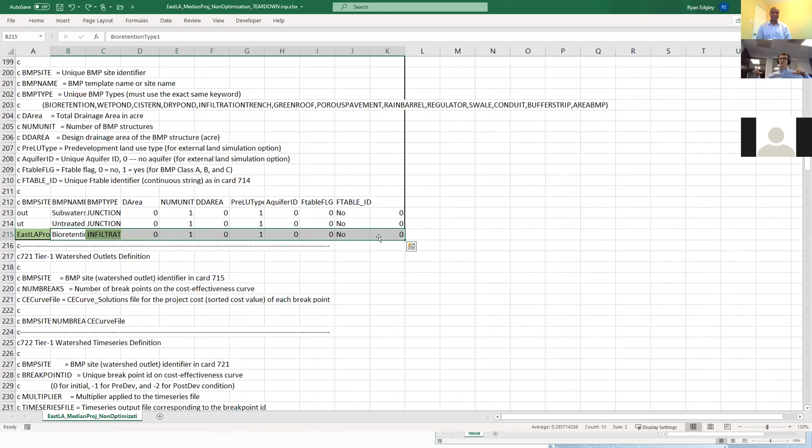I feel like we're trying to step through this really slowly because it is so much. And so we are really on the first card that just says, hey, there's a BMP and there's 2 junctions. That's all this card says. And if you want to add a BMP, you add another line. For the most part, you just copy and paste the line above and just add a name for that new BMP. That's all card 715 does. And I know that's not very exciting yet, and we're getting to the good stuff, I promise.

The next couple cards, C721, 722, pump curve. I kind of want to skip those altogether because I've never used them. I don't think any of you will ever use them. Just ignore them. 725. This is a big one. There's a lot of action happening in 725. This is where you start to define what that BMP looks like. And again, there's all these commented things above which pertain to these parameters across. So if you're ever like, what is width? Well, that's just the bottom width of the basin of the BMP, and that will be the infiltration area of that BMP.

So width and length is sometimes more complicated than it sounds. You may have a big footprint, but if your infiltration area is really small, what Sustain is asking for here is your infiltration area where water is going to be going through, because that's going to dictate how much can move. If you've got a big footprint, you can move more water in an hour, but if you've got a small footprint, you can move less water. So that's width and length.

This is where it gets a little complicated, but let's say you've got a really small patch of infiltration area, but you've got a huge BMP otherwise. It's probably not common. But you have to think about, well, I have to have the footprint the same size as the infiltration area if we're infiltrating. I have to take that volume and kind of move it somewhere else to make sure that capture area is there. So that's kind of a special case. I don't want to spend too much time on that unless maybe at the end if we have time. In any case, width and length, almost certainly you'll be changing these a lot. We have an acre here being represented. So if I multiply this times this, I'm going to get 43,560 or thereabouts. And that's an acre because that's the size of our BMP.

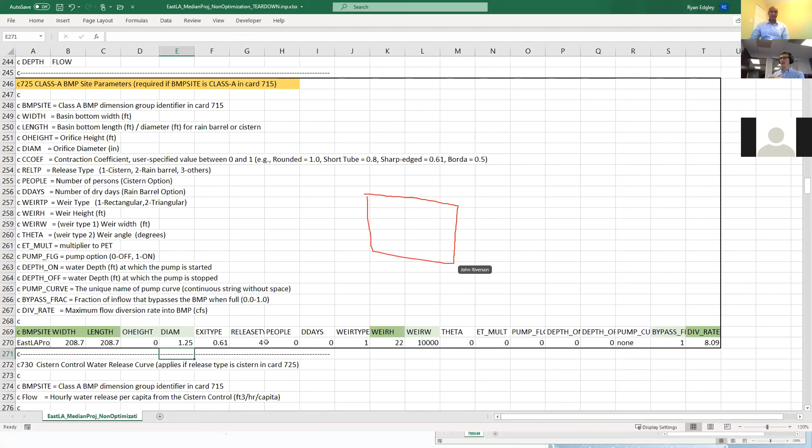But this is the first part of setting up either a sewer diversion, or you can also use this sometimes if you want to model a fixed discharge rate for like an infiltration well and say, well, on average, one infiltration well is going to do 1/4 CFS exfiltration, and I've got 5. Well, I can just multiply that by 5 and do 1.25. And instead of doing infiltration as an infiltration rate through surface area, I've done that instead to this right here. And John's got a box I think he's drawing.

All right. So here is our diversion rate that comes into the BMP. And what Ryan is describing is we can have an orifice. Now, in this case, if we use this release type 4, then we change this discharge rate as an orifice outflow. So that's the rate at which it's going to come out of here. There's still another outflow, which is when this thing is full, we're going to overflow the weir. And so that's the weir outflow. And so we have one flow rate coming in, and then we have 2 different outlets.

And you'll see later on, we haven't talked anything about what happens because we can bolt another piece on here, which is a soil layer. We're going to get to that. If it's applicable, then you have an underdrain outflow and so on. But as far as what we're seeing in this card, we're just talking about the surface piece right now, which has 2 ways out, at least for this BMP type that we've specified.

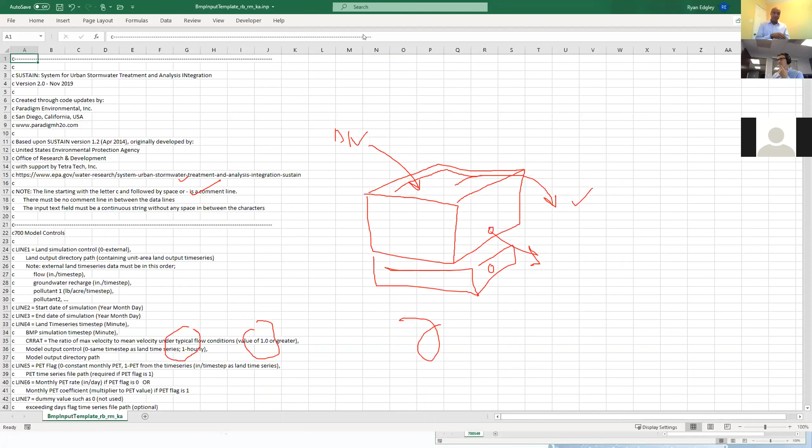So you can imagine if we had other BMP types, let's say we had a cistern or a rain barrel, those also have release rates, but the way that those happen are going to be slightly different. Because in a rain barrel or a cistern, you have other parameters that can be used to decide how the water is released. If you've got a cistern that's being used for gray water, purple water recycling in the house, for example, then that cistern is going to be used for toilet flushing. You might have a diurnal pattern that shows when the water is being reused and how many people there are. You can specify that, and that's going to be used to decide how the water is released and used downstream.

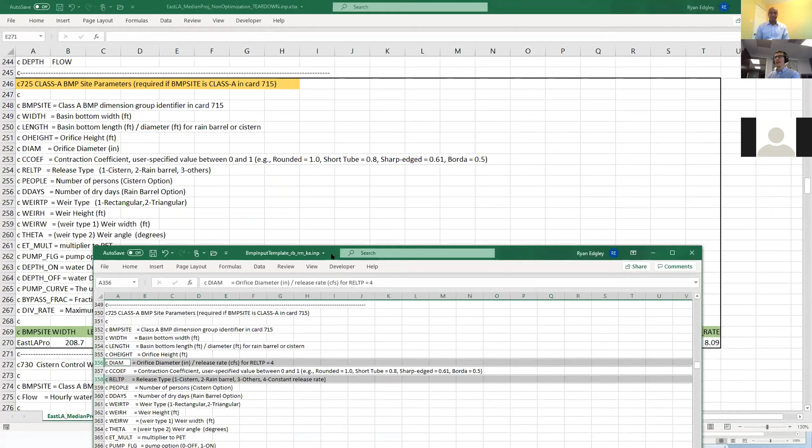But this gives you that feeling of, these are the types of knobs that we have to turn. And for this case, these are the two outflows that we can work with. And later on, we'll see what we do with those two. Okay, so as you all can see, it gets complicated really quickly. I'm gonna show another input file. So I apologize. This header is actually slightly out of date. I'll get you all a new one so you have it. But this is what the updated header looks like.

So it has release types, the same exact thing, but we have this number 4 option, constant release rate, which is, let's see, release type here again. Nothing in here is using that. And then I've also got diameter. So normally it's orifice diameter in inches, but if we're using release type 4, then it is a release rate in CFS. So again, if I go back over here, I've changed the release type to 4, and now I'm releasing at 1.25 CFS. So that's the max value that it will release at. If there's more water, it will slowly drain that down. But if there's less, it will do all of it until it's empty. So that's how that works.

Yeah. And that maximum also applies to the inflow, the diversion inflow rate. You can only send water into it at this rate. If there's water coming from upstream that's higher than that, then the difference just continues downstream to the next node in the system.

Okay, I lost my chat, so if I can't see it right now, I'm going to try and get it back up as we move along. So I may miss things, but John, if you see something, let me know.

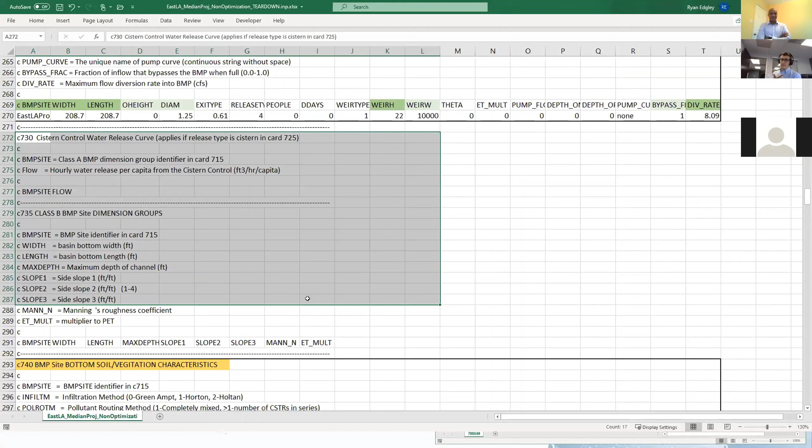So card 730, cistern control. I don't think we're going to be doing that, so we can skip that. 740 is another big one where now we're starting to get into the soil vegetation. So the second layer, soil and vegetation characteristics. Again, we've got that BMP site here. So it's telling me this is the BMP for which these parameters pertain. Most of these things, I don't think you can adjust. So it's just the ones here I have.

Soil depth. Is there soil depth? 0 if not. And if you've got 5 feet, it's 5 feet. If it's 2, it's 2. I'll change that back to 0 since we don't have any here. FINFILT is the infiltration rate of the media in the BMP. And so we have 4.63 inches per hour for the native infiltration. So we're actually going to use that in this parameter value as well, because we don't have the under drain on.

And this is where it gets a little complicated too. If you're going to use an under drain, it's kind of a question you ask yourself before you start this. And if the answer is yes, the switch goes to 1. The next thing here is, how deep is that under drain depth in feet? Let's say it's 1 foot. What's the void space between the aggregate in there? Usually it's 0.4.

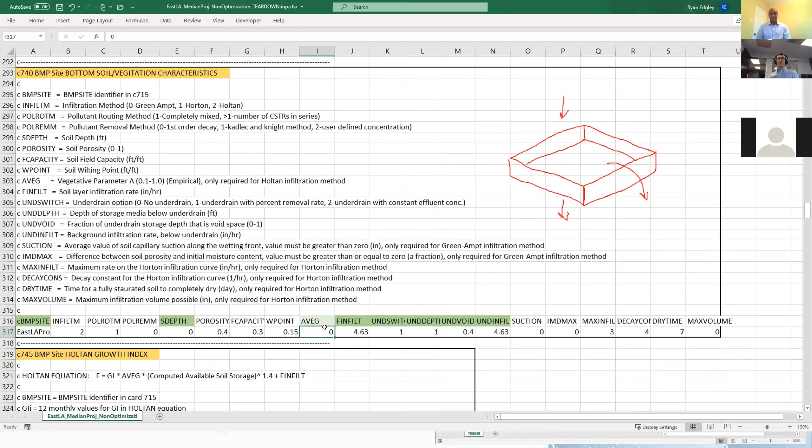There's also a growth index here. That's done in the next card, but these two are related. It's about vegetation, whether it's present and how robust and healthy and active it is. Because the more you have, the more it will draw stormwater out of that bioretention cell or whatever the BMP is. If you don't have any, the answer is really easy. It's 0. If you're subsurface with no vegetation, you're always going to be 0. Even a sand filter that's subsurface, I would still put this at 0. So that is that there.

And John has drawn this nice diagram here where the soil is just this flat layer, and the percolation rate is that 4.63. How fast does it move through? And if there's no more space in that soil depth, that volume, it will overflow. Anything that makes it through, if there's an underdrain, will go through that underdrain. And if not, it will go right to the native soil infiltration at this rate.

The one thing I think is useful for pointing out is if the underdrain is off, this is your native soil infiltration. It's also your media. It has to be both. And so if you have a soil that's 5 inches per hour, like your media, your geomedia that you're buying, and your native soil is 2, well, do you put 5 or 2 here? You always put the native, which is 2, because that's what's restricting the performance.

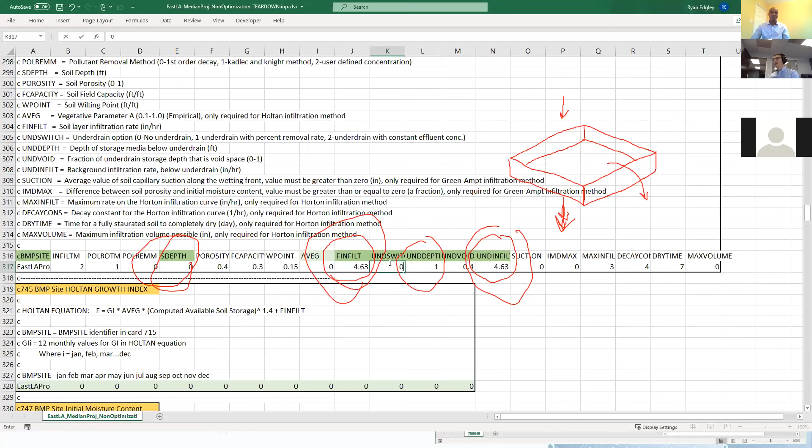Okay, perfect. And I'm going to change these back to 0 since that's what these were before. So I'm going to move through to the next card. Reference it a little bit, the Holtan growth index, since we are using Holtan as an infiltration method. This is subsurface, so it's all zeros. There's 12 zeros here for every month of the year. So you can get really specific with, there's a lot of growth index in spring and summer months, or maybe mostly just spring, and not so much in winter and not so much in fall or summer. You can specify that here.

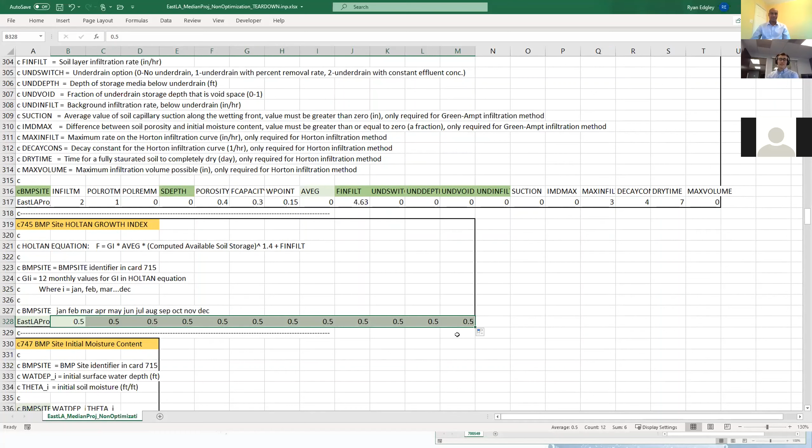9 times out of 10, if I'm going to use this, I'm going to pick one value, and I'm probably going to move it all the way across and do it the whole year, the same thing. One, because it's California. We don't have harsh winters like the Northeast might, where your plants are going to be covered in snow, and we don't have a high latitude where you're going to get little sunlight. So there's not that much variation here. It's also, the model's not very sensitive to this. So if you jack this all the way up to 1, put it all the way to 0, it's not going to make a big difference, or not too big of a difference.

And John's pointing out the function here. So this is a value inside of this Holtan equation for infiltration. So it's a multiplier that goes up front. Yeah. So the key driver here is going to be the final infiltration rate and then the computed available soil storage. So all this does is, if you plot this infiltration curve, at the beginning, when you have a lot of available soil storage, infiltration will be high. And then over time, it will reach this final infiltration rate asymptotically, because this is a nonlinear equation.

And so that's the simple construct. It's pretty handy because we have all this information. We know how much soil storage we have. When that is full, we're going to approach our saturated infiltration rate, and that's it. So this coefficient just gives you a way to kind of modulate that seasonally if you want to. But it's a pretty simple infiltration function, and for this purpose, it works pretty well.

Okay, great. I'm gonna keep us rolling. This is initial soil moisture content. You know, usually these BMPs aren't totally dry, so we have usually as a default 0.15. So there's a little bit of moisture here to start with. Instead of a spin up, we start with this.

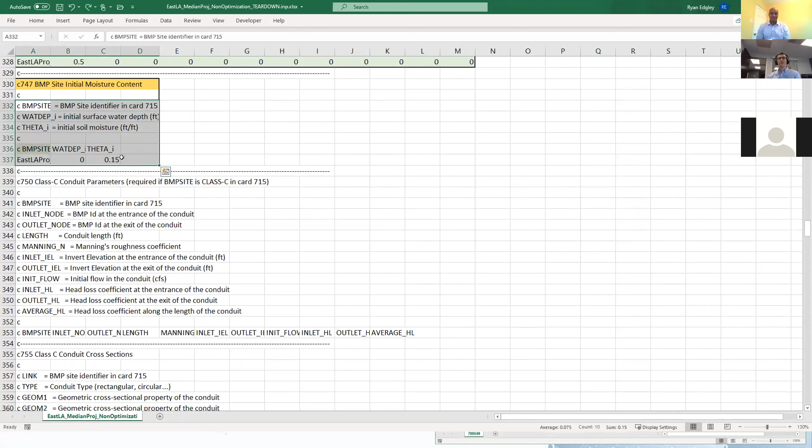And so if you're gonna add BMPs, what I would do is just take that name. You can insert new ones, add the name, whatever it is, and then just copy paste this thing down and move on. Since we don't have much time, I'm gonna kind of just leave it at that for this one, because it doesn't play a big role in terms of performance, and then we always use that same value anyway.

Class-C conduits, we're not gonna do anything there. Regular cross sections, no. Buffer strip, no. You'll notice that there's a lot here in the middle that we're not gonna do. Area BMP, no. This is a little more actually useful. I think we should mark this as something that people should stop at.

We always use standard pollutant decay and loss rates. And so this is first order decay, and this is the values for it. We always use the same number for every pollutant. If you want to get really picky and dial this in and use different decay rates for these pollutants, the pollutants are in order that they appear in card 705, I think it is, the pollutant identification card. This is pollutant 1, pollutant 2, pollutant 3, pollutant 4, 5, 6, 7. I would never change these.

If you're going to add BMPs, I would probably just drag and drop these down, because there's some amount of decay happening at a very small amount. You can tell these are pretty small numbers in these BMPs. So there's that. That's just kind of a standard pollutant decay loss rate.

I think this is Kadlec and Knight. Yeah, I've never used Kadlec and Knight. This is another way to assign performance to the BMP, and there's a couple different cards for it. This is one where if you don't use this performance removal method, you can just skip it, and you can see that it's blank here. There's no BMPs here. Card 767 is, again, Kadlec and Knight. We can skip that.

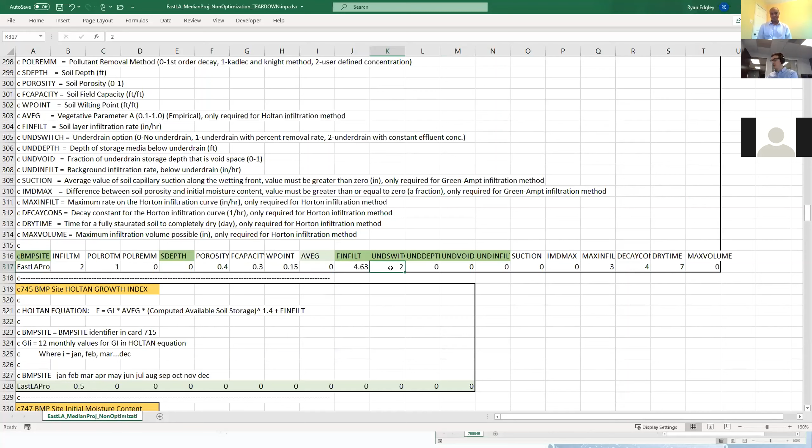And then in card 770, whatever it is down there, that's where those numbers have to show up. So Sustain will connect those 2 things. If you don't want to do that, you want to do constant effluent rate, that's 2. And that's where you're saying whatever leaves, it can't be bigger than this number. Of course, that number is going to come through other sources. Some sort of research will dictate what that value is. And so again, that's where we handle those values.

Yeah, so TJ asked if you can do a percent reduction for an orifice. If you're talking about orifice as in something that's coming out through an underdrain, yes. Other than that, you can't. But what you can do is you can specify the treatment through the outlet when you have that fixed outlet for the orifice. That one can be used in the case of release type 4 on 768. You can specify what the release concentration is. So it's not a percent removal, but you can specify a treated effluent concentration through the orifice.

The other thing, so there's a couple different ways to get at this. So like John, you're saying, there's not a straight percentage that can be applied. And it looks like TJ is saying they usually work in percentages. So we're kind of constantly trying to add new functionality. Card 768 is brand new, and so we weren't able to do that. I think ultimately we want to add concentration as a function.

What you could do instead to get around that is you could start to use pollutant decay loss rates, and you can parameterize these to get at a percent reduction. It won't be perfect because depending on the retention time that stormwater is in at that BMP and the storm size and all these other considerations, you may not get the same exact percent, but you could dial these up or dial these down to get a higher pollutant decay, and that will get you maybe closer in general to that percentage that you're after.

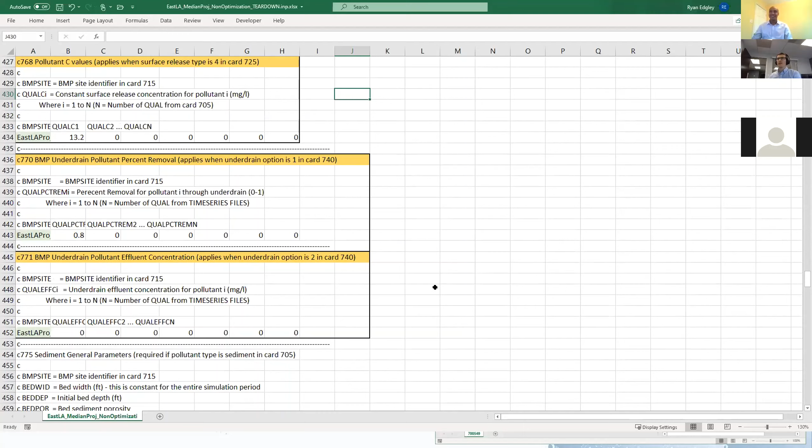Okay, great point. I'm gonna start moving past the underdrain stuff. There's a number of other cards that really we don't adjust or play around with too much. The next one that we're gonna talk a little bit about, but again, I want to keep it brief because we are in the final 54 minutes of the presentation, is that we've talked about the BMP and we've pretty much set the BMP up in the model. We know what it looks like, dimensions, height, treatment if there is any soil, so on and so forth. And now the rest of it is, well, what's the network and what's the model environment around this BMP?

And so this is looking at the upstream drainage area. And so this card can get really long. The first column is just a counter. It really does nothing except count. So if you're going to add to this, all you do is count down further. The land type area, this is going back to card 710, I think it is.

Yeah, there you go. Thank you, John. And we define land type 1 as HRU 1000 road type freeway or something like that. Land type 2 is HRU 2000 road type primary, 3, 4, so on. So we have a code up there in card 710 that this references to. And so what we're saying here is that there's 22 acres of this HRU. There's 46 acres and change of this HRU, so on and so forth.

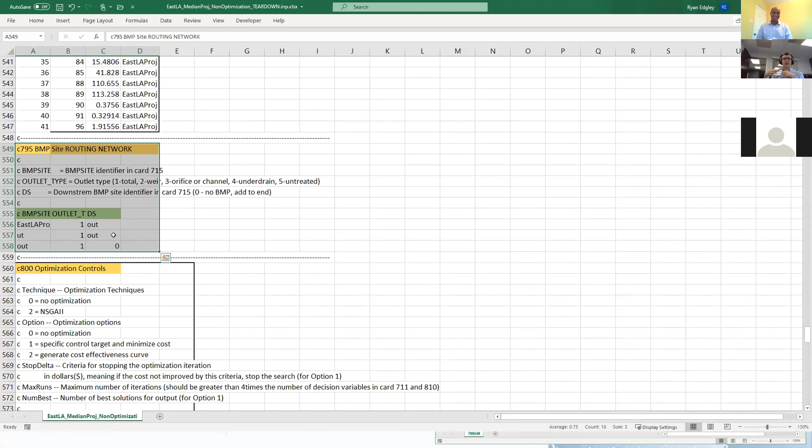The routing network, to me, 790 and 795, I'm glad they're placed right next to each other in the model, because in my brain, they also sit right next to each other. Above in 790, we just said there's this acreage going to this most downstream node, whether it's a BMP or a junction. And then we start to connect those nodes and junctions together. Is there something downstream of that BMP? In this case, it's just the outlet.

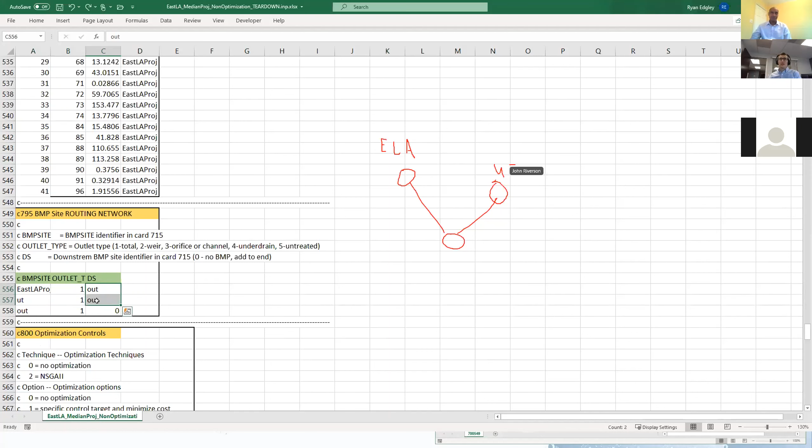We also have the untreated node going to the outlet, but because the untreated node is not in here, it's not really doing anything. So it's sort of redundant. You could take this out and the model would behave exactly the same. We keep it in there just because sometimes we use it. And then always the final one here is whatever is the most downstream needs to go to 0. So this is sort of a dummy row, but Sustain uses it just to know that the model has an outfall point. So out goes to 0 by 1.

Outlet type, it does get a little more complicated here, because we shouldn't spend too much time on this, although we could spend a lot of time on this, but how do you train? So this is where you do treatment trains. So let's add some space in here. I'm gonna put this here. I'm gonna start making dummy stuff. And it looks like, John, you're doing it too. There's that East LA, he's got untreated. And that's what it looks like now.

But let's say we want to add something. And I'm gonna add, there's a cistern, and I'm gonna just name it what it is, cistern. And then there's bioretention. This wouldn't work because I haven't introduced these in 715 yet. This is presuming I've already done that, and I've done everything right upstream. I've already characterized the cistern and the bioretention. So if I wanted to add those to the routing network, I would do this.

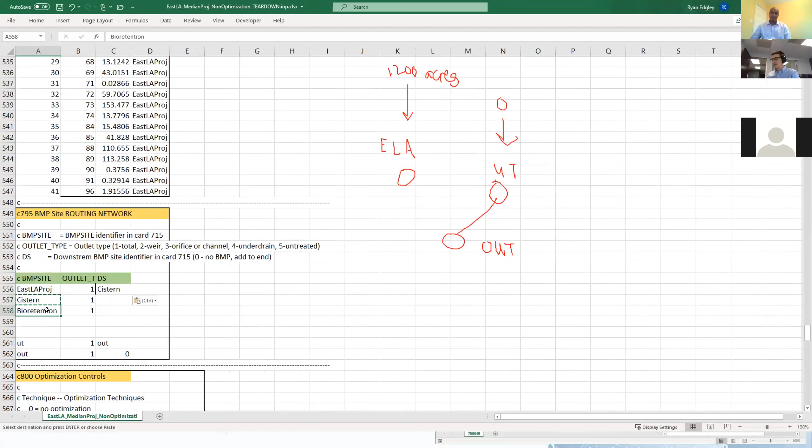East LA is going to go to the cistern. Downstream of the cistern is the bioretention. And then downstream of bioretention is the outlet. Oopsie. So now I've got a train of BMPs. It can get even more complicated than this really quickly, because what we're saying right now is we've created additional nodes, as John's drawing here, for these other BMPs, and that's all fine and well and good.

But what if I want my orifice flow, my release type 4, which is representing my sewer, what if I want that to go to a dummy node? Right now, if the cistern is the BMP that has, well, let's stick with East LA project. If East LA project has that release type 4, and I'm putting, let's say, 3 CFS down to a sewer, and that's what I want to do, I can't use 1 anymore as the outlet type,

because I'm taking all of the things leaving the BMP, whether it's weir flow, overflow, underdrain flow, untreated flow, all the types of flow leaving the BMP, it's all going down to the cistern when I use 1. But I've got this sewer functionality that I want to use, so I've got to repeat this a couple times. I can't use total anymore. I have to use 2, 3, 4. Oops, sorry.

It is doing things I don't want it to do. 4 and now 5. And so anytime I want to start getting a little more detailed in terms of, well, I don't want my underdrain flow to go down to that BMP, because that treated flow is just going to dilute what's going in that BMP, and then it's going to get treated twice. And sometimes that's happening in reality, and sometimes it's not.

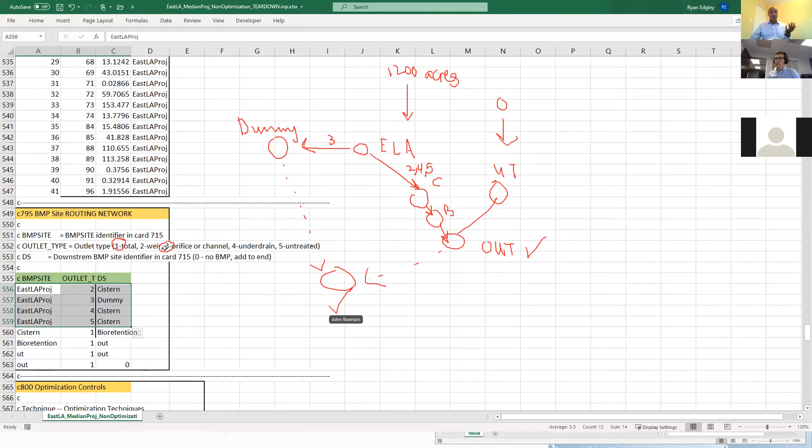Another point that I want to make on here is, let's say you want to know what the total benefit of this is. In reality, you can't measure it only by looking at what you see at the outlet. So in some cases, you could define sort of this virtual outlet somewhere over here, where you would take the dummy outflow from here together with the outflow from here, and then you would evaluate what's my total load reduction or my total concentration, whatever it is at this point.

It's not a real point because this is actually at a treatment plant. And this one is the outlet of your network. But you could define a virtual point where you can send 2 of these outlets. The world is open, and I would describe it almost like a Lego box. You can put these things in the way that you need to represent them to answer the question that you're trying to answer.

Oops. So yeah, I kind of just did what John was describing. Well, now what we've done is dummy is going to go to this virtual node, and now outlet goes to a virtual node. And so you can set your assessment point at that virtual outlet node, and that will tell you everything that's in the system is being accounted for there.

And without getting too philosophical, what John was saying about, whatever you imagine, whatever system you have, this is where it happens. Like, oh, I've got all this crazy routing, or I want to do this in terms of moving flow here and there, and underdrain goes that way, orifice flow goes that way. This is exactly where all that happens. And it can get really complicated really fast.

You can accidentally do circular routing. SUSTAIN will give you an error for that. Like if you route East LA to Cistern and then Cistern to East LA, SUSTAIN will stop you right there and say no, you can't do that, because that water is just spinning in circles. And it gets really easy to do that as you start to add these things.

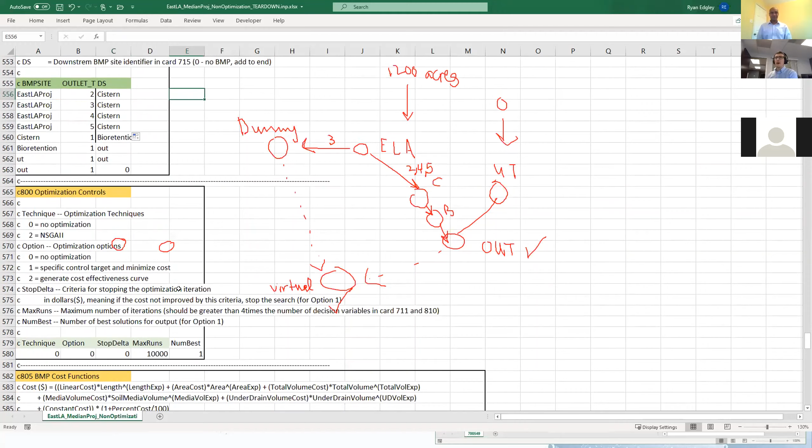Okay, again, we could probably talk a lot about that, but we gotta stop somewhere because we only have so much time left. Optimization controls, since we're not doing that here, we're just gonna skip it. If and when there's ever a future presentation, we'll probably get into more details there. Cost functions, that's really for the optimization. You could do it for a single solution run, but the size isn't changing, so the cost isn't changing.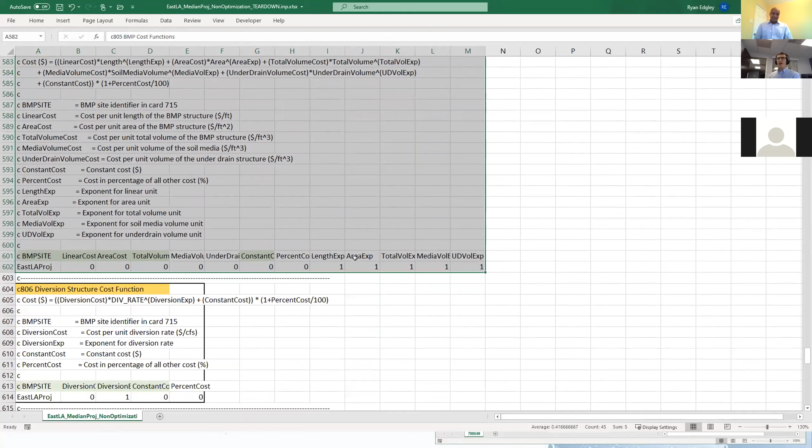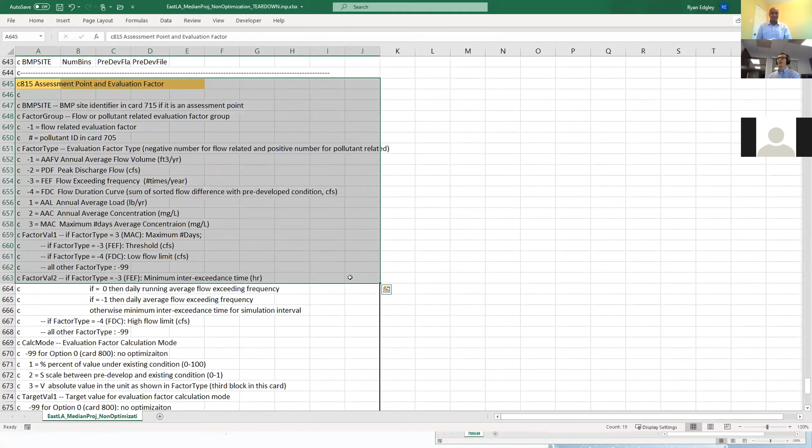Diversion structure cost, again, it's just another cost function. We're going to skip it because, since we're not optimizing for diversion, there's no change in cost. 810 is adjusting your variables for the optimization. Since again, we're not doing optimization, we're just going to skip right by it. And now we're at the last card. I bet you're all really excited to talk about the last card and move on to the next thing.

So now we've defined the routing network, drainage area, connections between the BMPs, what the BMP looks like. Is it diverting to the sewer at a fixed rate? Is there underdrain treatment? All those things have been configured. The last thing is setting the assessment point. And you can see all the comments for this one. Gosh, look at this thing. This is really long. There's a lot going on here.

There's only a few things that are really important for what we're doing. One is you can add several lines here to get different pieces of information. So this first line says, I want to set my assessment point as the outlet, which is defined here as out, but that's the final node in the network as it was originally drawn. I want factor group 1, which is my pollutant ID. So factor group 1 in this case is total suspended solids.

My factor type is my evaluation factor. So really all I'm doing is going up here and reading these things. And that is average annual load. So what this is saying is tell me at the outlet what the average annual load is for total suspended solids, and I'm going to call it total suspended solids.

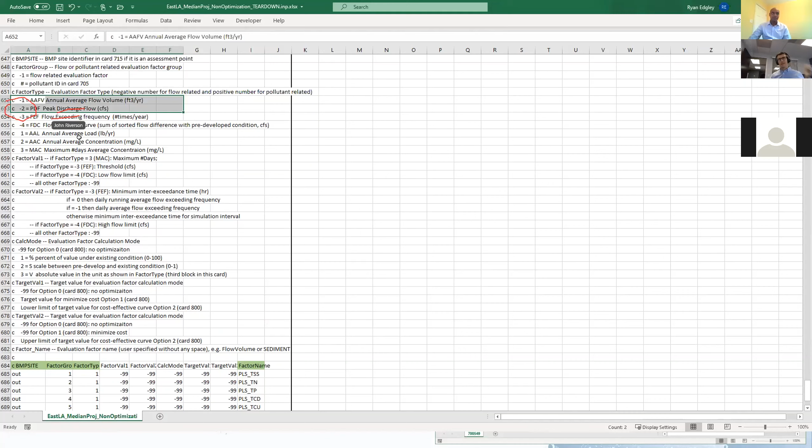And so I know this is a lot of numbers to get things that you want, and I always have to go up and read this again and again. The important thing is to define your assessment point. At what point in the nodal network that you've created do you want SUSTAIN to provide output? Well, that's the BMP site.

I wanted to do all of my pollutants. I wanted to do it average annual load. These are my names for it because these names will just go into the output file. And then I also want to do the 2 flow factors, my average annual volume and my Q peak. And again, I've got names for those to remind myself what those are.

And so here, you can add every node in your network. You can set assessment points everywhere, and the model will output at all those places these factor types and factor groups that you specified. John, I feel like there's stuff you want to add here. Oh yeah, this is great. This is where you are saying what you want to evaluate.

Now, notice this outlet. When you output at the outlet, the only thing that you can see is the total flow that came out. I wish I hadn't erased my network, but if you decide to output at East LA itself, you can also do that. And what that gives you is the time series through each outlet, through the orifice, the weir, the underdrain, all the different outlets.

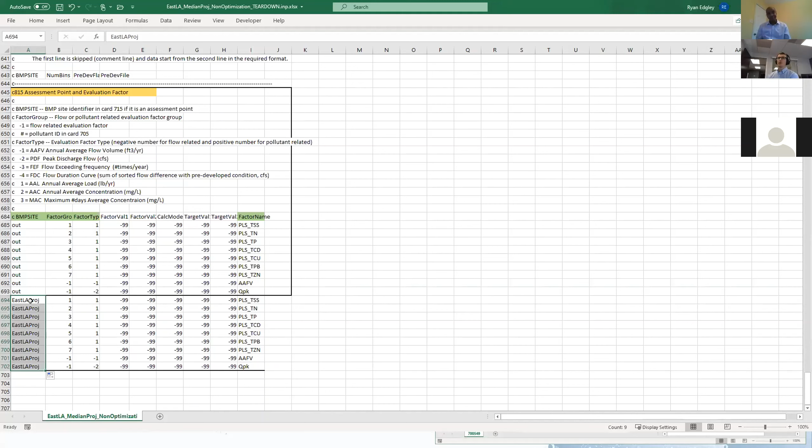So what John was describing is if you want to know what's happening at BMP site East LA project at every hour and get that time series, all you have to do is add it here, and now you'll get the output here as well. If I was someone who hadn't used SUSTAIN and was just starting, I would be adding probably every node in my network just to confirm that I understand what's happening, because we only use the outlet or final node since we generally understand all the connections.

But if you want to confirm, how do you know that 3 CFS is actually going to that dummy node? You would have to put that in here and see that. So if you wanted to see the dummy too, you could just add dummy. And now you'll get a summary file with all these, but you also get the time series.

And so if you open up the time series for that dummy node from the output, you should see a hydrograph that's cut off at 3 CFS, meaning it gets flow, but never more than what it's supposed to. And then it'll stay flat until the runoff drops off from the storm. So that's what you would see at that dummy node. If you have multiple things going in there, it gets a little more complicated, but if it's just one, that's how that works.

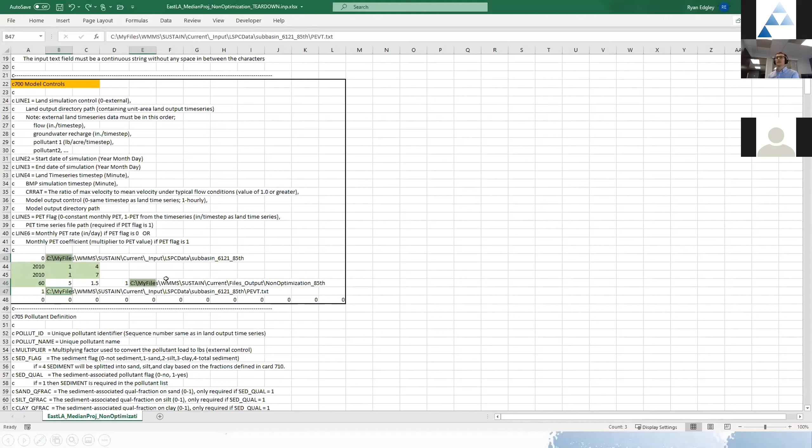I'm going to go back over here. What's happening up in card 700, I get these wrong almost every time I make a run. Like I've got it pointing to the wrong place, the directory doesn't exist. That's really common, and that's a pretty easy fix. You just make sure that the directories you're pointing to exist and the right data is there, and you'll be fine.

No spaces in the folder pathway. This is kind of a funny thing. I don't remember exactly why this is, but let's say my folder was named LSPC space data. Sustain doesn't like that. You have to have non-spaces throughout the entire folder pathway. And you'll notice that we use underscores instead of spaces. So you'll have to do the same thing or just use no spaces at all. Make sure that there's no spaces there.

Dates and time steps: just making sure that whatever is in the HRU, whatever you want to run for your simulation, that you're updating the dates and the time step to match. So it's almost always hourly time step. And whenever the storm or time period that you want is starting and ending, that matches in the input file that you're creating.

Circular routing, we talked about that. Sometimes you get a complicated network and you don't realize that you're kind of just moving water in a big circle. Sustain will throw an error for that, and it'll tell you if you have that. So you want to be careful of it, but if it does happen, Sustain will give you an error.

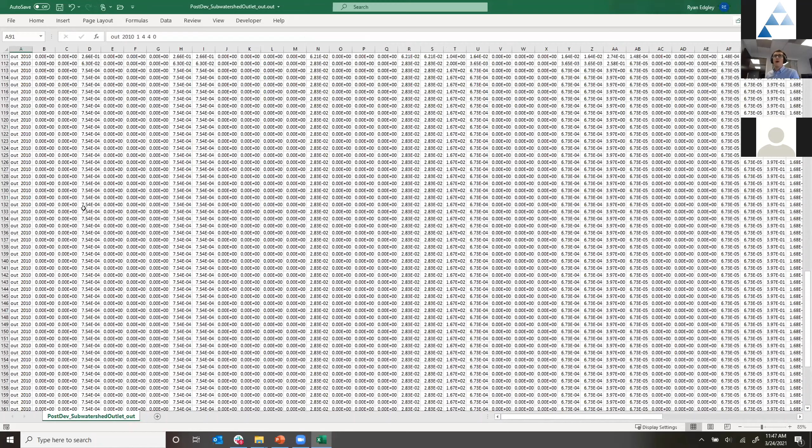But the short version of it is all of these headers, and I'm going to do a transpose here, it might take a minute to think about it, pertain to all these columns going across. Hopefully that will unlock soon. There it goes. And I can blow this out entirely. So all these are just a listing of the headers, and I just placed them over here because it's a lot easier to see and know what the heck is going on.

So you've got your date and time here, your BMP volume, your water depth, inflow, weir outflow, orifice channel flow, under drain flow, all of the different avenues and motions of water and pollutants are being tracked here hour by hour. And so this is what we were saying earlier about being confident that your model is correct and water is moving when it's supposed to move to these different nodes and BMPs. This is how you jump into the model and see that.

One thing that I think is really important here, well, there's a couple things. Sorry, I'm flicking around a lot. All your flow items are kind of up front. At the end, you start getting into your pollutants. So this is pollutant 1, and all the different things: mass in, mass out, mass under drain, pollutant 2, pollutant 3. So again, it's using that same pollutant identification where pollutant 1 is TSS, pollutant 2 I think was total phosphorus or total nitrogen, and so on down the line till zinc.

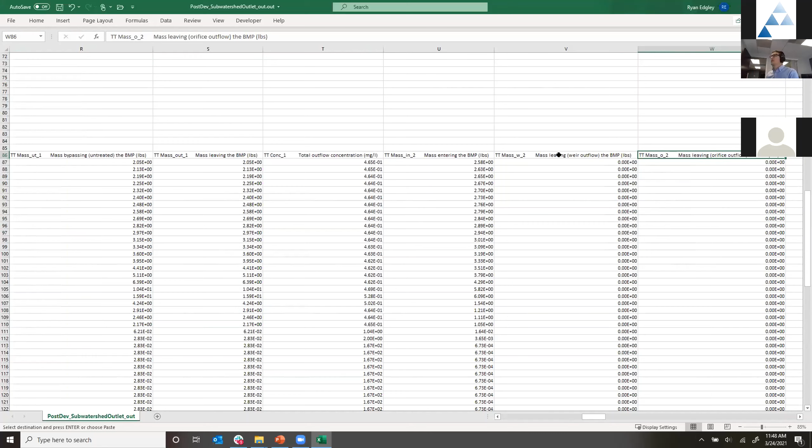And so you're tracking every cubic foot of water, every pound of pollutant in the flow that's moving all that around. And so being able to open this up and figure out what the heck is going on is really helpful, and Excel is great for that. It'll give you the hydrograph for your total inflow. So this is the inflow going to the BMP before and after. You'll notice there's a lot of extra time at the end here that we run the model. We don't necessarily need to. All the water's passed through the BMP. So this is your inflow to this node, which is the outlet node.

What John was saying before about what we're outputting, and I closed that spreadsheet, but this is only showing flow and time series at the outlet. If you want to know what's happening at that project, which I think you all should, you would need to specify that in the input file. And once you do that, it will show up here.

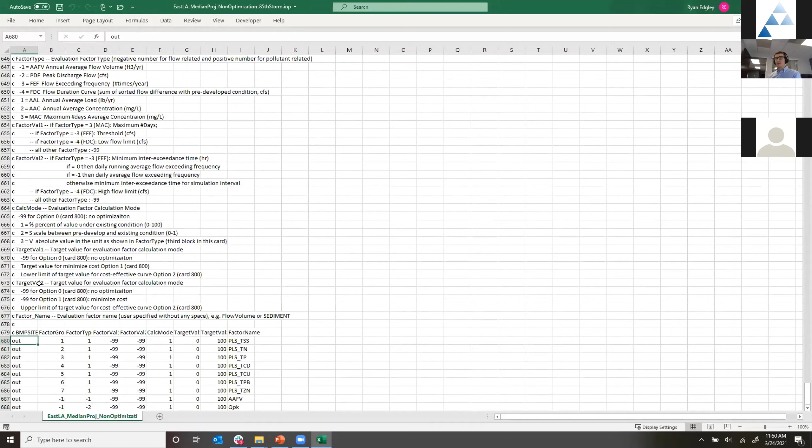So notice that this is labeled out. And that matches with our input file name for this node. So if I go back in here, this will open it in Excel again. That same name is here. And so if I just change this, we can do this really fast, I hope. I'm gonna change this to this. Oh no, I can't do it in Excel. That's right, darn it. Okay, well, I won't do that.

But in any case, if I wanted to change my assessment point or add an assessment point for East LA project because I want to see the time series there, I would just make that change in the last card of 815, rerun the model, and it would output that right here, in that same place. And so instead of out, it would say East LA project, I think is what it was, something like that. And that would give you all the flow time series and load time series happening at that place.

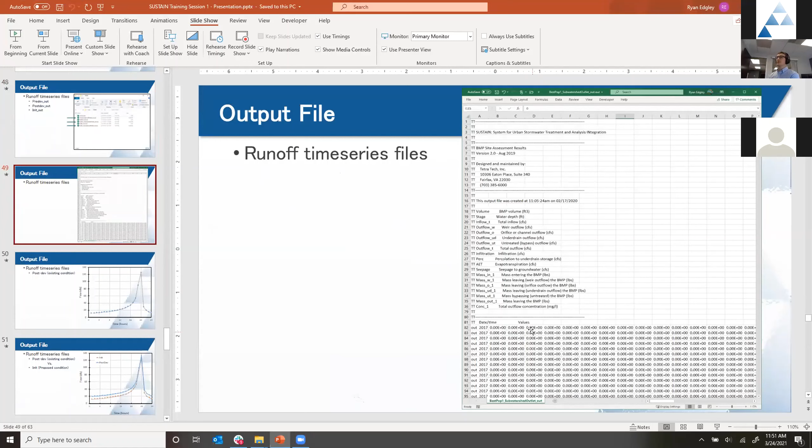I kind of made some plots for this. We just looked through this: what that time series helps you do, and what this evaluation summary time series helps you do, is make these plots. And so this is exactly what I just showed. What's the post dev, which is the existing condition, flow going to the outlet. So that's under the current condition with those HRUs.

Well, if I add that BMP at the 1 acre footprint, 22 foot weir height, and all these other parameters, that's the init. And so I can plot that time series right next to it. You can see there's a reduction because that BMP is taking water and infiltrating it to the subsurface. And it's a big BMP, it's doing a lot of work. So that's kind of one way to display your output.

The other thing is the summary, which we just talked about. And usually I just do bar plots for that. And so this is the volume in acre feet at the outlet for post dev. And then this is the init summary file, which shows that we've reduced volume by a pretty good margin, over 20%, down to about 100 acre feet with an 8 CFS diversion rate.

I did run another version where I said, well, what if this thing's online? How much better can it get? And so you can see that post dev, of course, stays exactly the same. It's not changing. The pre-BMP isn't changing. Instead, just this proposed condition is changing, and it's called init because it's the initial BMP run or the initial BMP output.

So apologies that we went through this really quickly, but hopefully it's given you all the foundation to say, all right, I know how to make adjustments to my input file. I can change the dates. I can get a different input time series from LSPC to make it long-term or 85th percentile storm. You have all of these input files that do that. So 85th online, you have the teardown that we did. You have a couple of these broke ones, and I'll show you what those do real quick.

I purposely made errors in the input files just to show you all what it looks like. So if you get an error that looks like this, it's because in card 700, there's an issue with the LSPC land time series that's being provided there. So you have to go back, look at card 700, make sure it's right, and then save it and rerun. So that's what that error looks like.

There's another error. It looks kind of like garble. Actually, it doesn't give you a good error. It says you're writing over protected memory, which is not true. This is saying that there's something wrong in card 710 where HRUs are defined. So that's probably just a clerical error happening there. So you want to just go back and confirm that nothing's happening there.

This one is where I have this batch file, but the instructions I gave are wrong. Like I gave it the wrong location for where SUSTAIN is. And so what the command prompt says is I can't find that path that you specified, which is true because I made an oopsie here. And if I do a control save and run that same thing, I think it'll get further past it. There we go. And so now it runs.

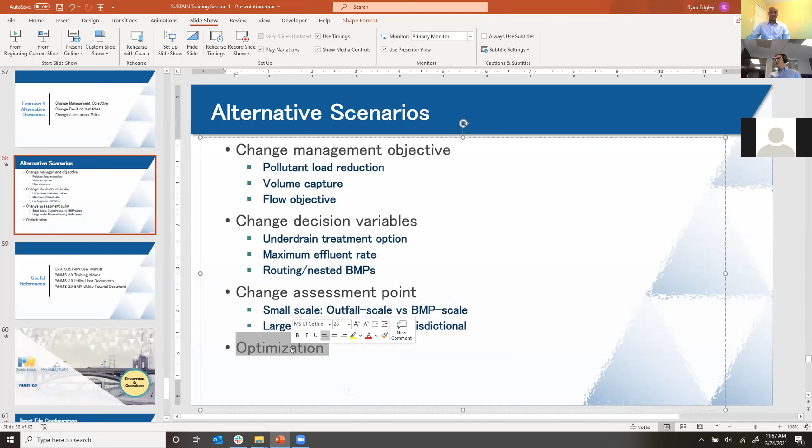So is that a consideration? There's also the optimization, which we didn't get to at all, but is a whole other avenue of discussion. So there's a whole other world that we'd love to talk about if that's ever of interest to anybody. There are useful resources. If you Googled EPA SUSTAIN User Manual, you'll get a little bit of help there. We've also created this documentation for WMMS on the repository. So those are there already for you all to download.

Last question from TJ, how would you size a dry well? I guess it depends on what you mean by size it. Like dimensionally, what would the dimensions of a dry well be? Or how do you size it in terms of an optimization? Should it be 10 or should it be 1 or should it be 100? So go ahead, TJ. Yeah, just the dimensions. When you put it in, how would you put the dimensions in? So that's a good question.

The standard that I use is if it's a 50-foot dry well with 1 foot sleeve, and we have this on the WMMS documentation actually. It's a 50-foot dry well, let's say, and it's got a 1 foot gravel sleeve and 2 feet of gravel underneath. We did the math on this a long time ago. All that space, that's actually about 62 feet of ponding height across, I think it's like a 4 by 4 footprint. Don't quote me on that. We do have that in the utility documentation. But essentially you would put it into an equivalent size.